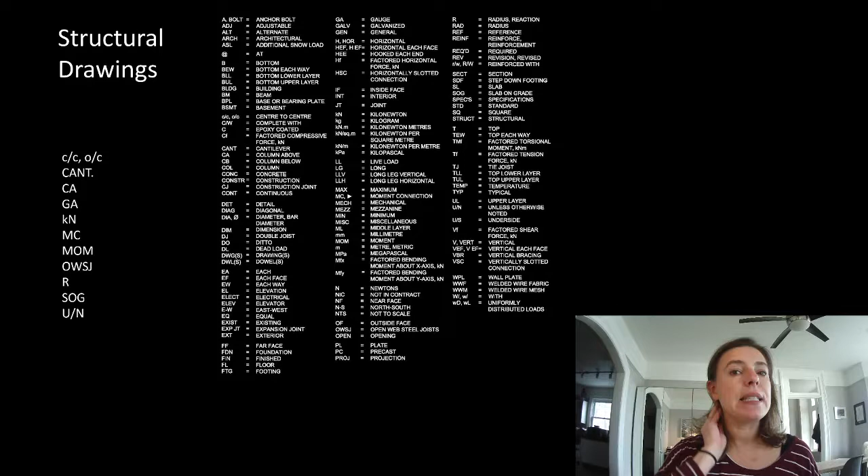Sometimes for small houses we might do something like that, but for the type of drawing sets that we're talking about, you need a set of structural drawings, and that's what you're going to produce in Structures 2 for me. So what I've given you for those two projects is the structural set of drawings and also the architectural set. Now, one thing that was really interesting about one of the projects, it's the Cube Lofts that Raw Architects were the designers for. It lent itself very well to be a steel building,

so we designed it and went out for tender, and right at that moment there was a blip in the steel economy in Canada, and basically North America. It was just leading up to the Beijing Olympics, and there was no steel to be found in Ontario, or pretty much North America. You just couldn't find it. You couldn't get it. So steel costs doubled in a week. They stayed doubled for about a month and a half. We went out for tender the week that steel started to explode. Tender came back obviously way over budget.

The owner wasn't an easy client to have, and the owner demanded that we redesign the building in concrete. And fair enough, they had had more experience with concrete buildings, and we as the design team had pushed them to steel. We said that the steel market was coming back down and to hold on because we thought that the steel building was the right choice for the project. They insisted that we go with a concrete building instead, so we redesigned the building completely in concrete. It took about 6 months.

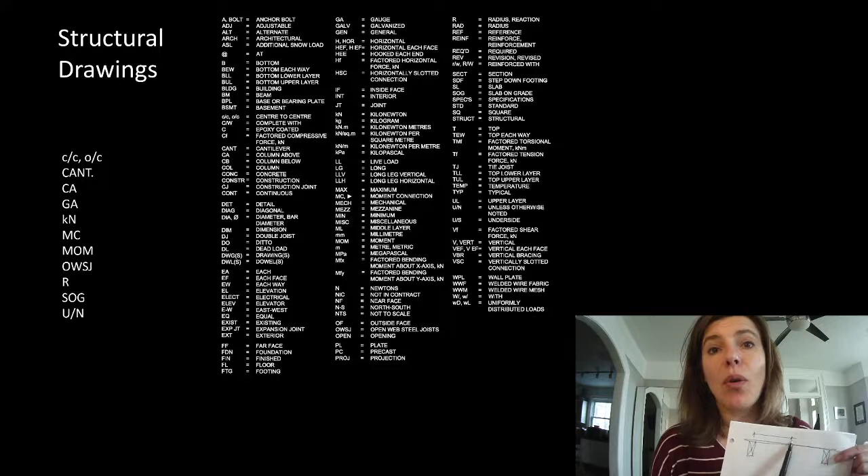And if we're talking about something that we have a lot of, we might say 2x6 joists at 16 inches center to center. And so we're saying that for that whole floor, every 16 inches you have to have a joist. So they could be closer than that, but they need to be no more than 16 inches apart. And so that's the CC or the OC.

CANT is cant or cantilever. You can see it right here in this. It means that there's a cantilever. It is only supported at one end. So a cantilever. I'm drawing a little picture here. If a beam looks like this, it's got a support here and a support here. This is the back span and this is the cantilever. It has to be connected across here in some way to make that work.

Or, and you guys are going to learn about this when we talk about free body diagrams in a few lectures, we could say that it is moment connected right here. And that is a drawing of a moment. Moment we have down here, or MC, moment connection, or MOM, we're talking about moment.

CA means column above. So that means if we have, in elevation, a building and all of these columns come down. We have this building here, and this is the roof, and this is the ground. All of these columns come all the way down, except for this one, and it sits on this beam here. And so in plan, we would say column above.

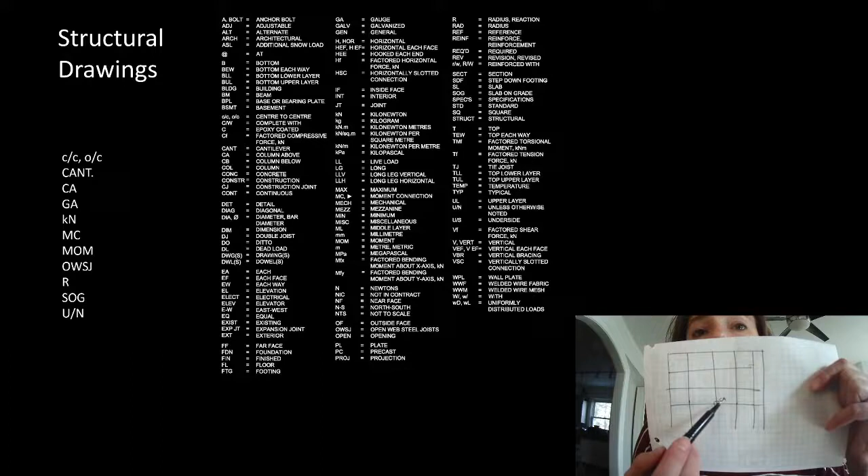So that's reminding us that that beam is doing a very big job. It's not just supporting the floor, it's supporting a bunch of floors above because there's a column above that does not go down below it. GA often means gauge, or the thickness of something, of steel. If it says 16 gauge, you can Google what thickness that means.

KN, kilonewtons, very, very important unit that we are going to use a lot in the next two courses, so this course and your Structures 2 course. In lecture 5, we're going to spend a good chunk of time talking about what a kilonewton actually means so that you can get a sense of it. But if you see this, you know we're talking about a force. So I touched on MC and moment.

Another big one that people tend not to know is OWSJ, or open web steel joist. An open web steel joist is not the same thing as a joist. It's not the same thing as a truss. It is a steel fabricated element, and we're going to talk about this in lecture 4 as well. And I'm going to show you a slide in just a minute, just so you can get your head around it. You've all seen what an open web steel joist looks like, and we use them all the time.

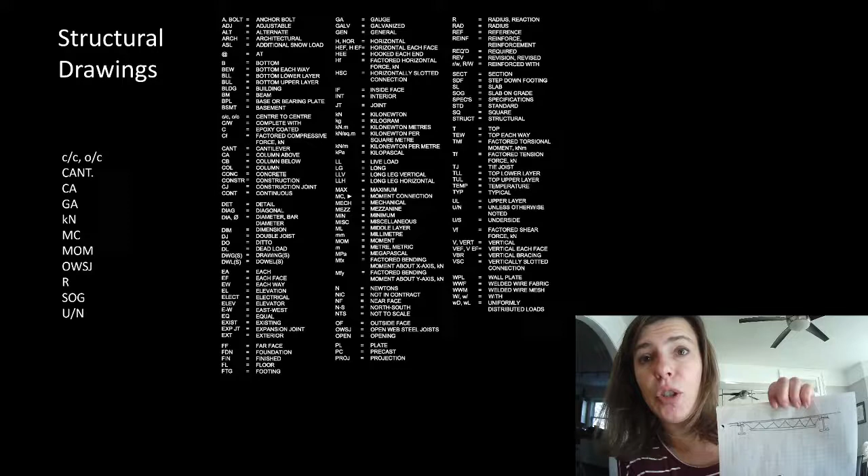Okay, an open web steel joist. This here is the open web steel joist. We've got a top chord, which is the top part. We've got a bottom chord, and we've got webs. An open web steel joist means that there's openings in the web of our joist. And so this is usually back-to-back angles, top and bottom, and then with bars or rods built up in between.

Look, the top of the open web steel joist and almost the top of the steel beam align with each other, or basically our deck is right there. We don't hang these from the bottom, we don't stack them on top. We do stack a tiny little bit, that's just because an open web steel joist has a shoe. And so we often drop steel beams that are picking up open web steel joists just a tiny little bit. But normally the top of all of our steel is at the same plane.

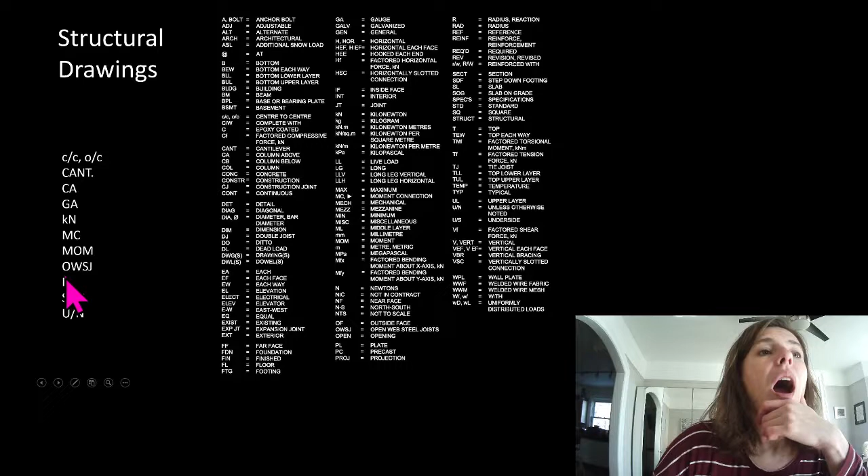R usually means, it can mean two different things. It can mean radius or it can mean reaction. So you have to look at it in context. SOG, slab on grade. And we're going to talk about that in the last lecture. Second last lecture, as well.

And then UNO, unless noted otherwise. So, like I said with the open web steel joist. So 2x8 SPF number 1, number 2, joist at 16 inches on center unless noted otherwise. So maybe there's a few spots that need something different, but that would be typical. So that means that everything that was written there applies the majority of the time unless there's a note on a specific thing that says otherwise, and it overrides it.

Like I said, we're talking about the loading side of things in Structures 1, and then talking about resistance or capacity in Structures 2. So we're really interested in things like Cf, the factored compressive force in something. Tmf, the factored torsional moment in something. Tf, the factored tensile force in something. Vf, the factored shear force. Mfx, maybe Mfy, but Mfx, factored bending moment. And so all of these little f's mean that we've factored them already.

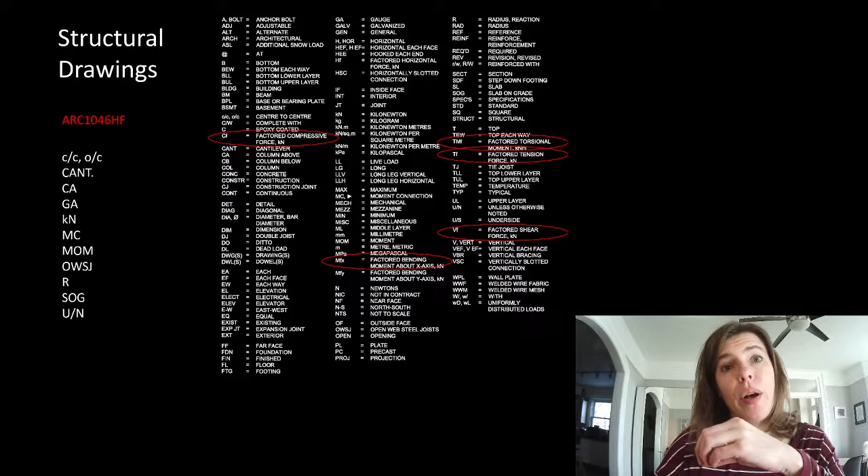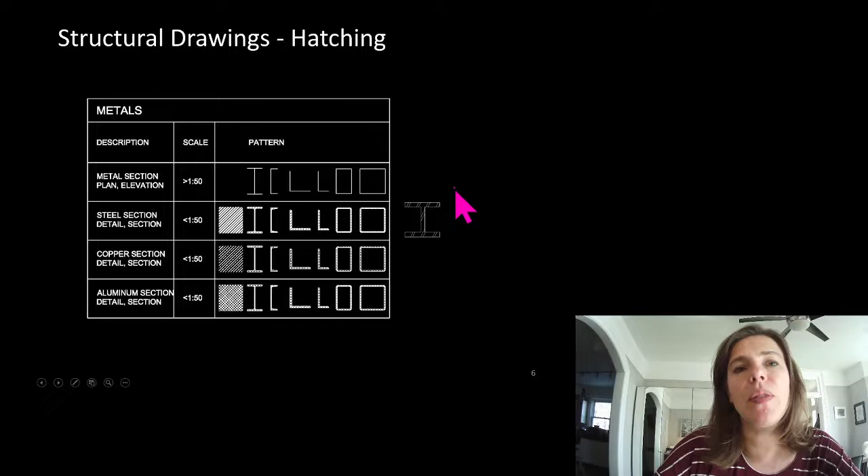This means you're looking at the section of a beam, maybe a column. Don't worry about this. Mostly I wanted to show you what steel sections look like. So if we do a section that is cutting through our piece of steel, our imaginary cut goes through the steel, we would draw these two little slash lines on a regular pattern across the section to say that that's a piece of steel. It just tells us at a glance that we're talking about steel.

I'm going to open up the PDF of typical details and just go through them quickly. We might jump back and forth between the basic building I created. Even though there's nothing normal about it, it's a building I created to help us talk about structural drawings.

Things that you should always, always, always have on a structural drawing set: grid identification, grid dimensions. In Structures 2, so many students do not put a dimension anywhere in their project, which means I don't know if the things they sized are correct because I don't know how big it is. I can't even correlate with what they've got drawn on there. Labeling things. Everything should have a name that correlates to something. So you could name your beams right on the drawing, or you could label your roof beams RB01 through RB100, and then somewhere else you have a list of what RB1 through RB100 is.

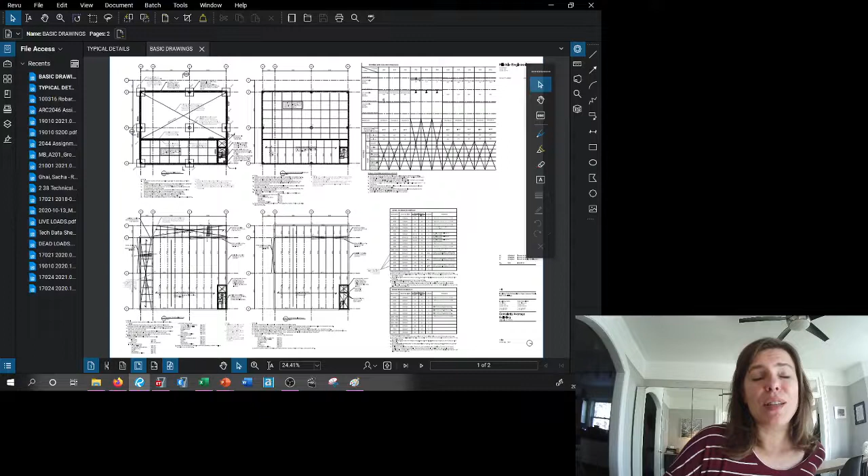I'm sorry, because my mouse is so large, it's very weird. Like I said, it can be minuscule or gigantic. It's just about the recording software that I'm using. It only lets it register two sizes. I don't even know why, but it only lets it register one of those two sizes, no matter what my screen is showing me. So we have to have the gigantic mouse.

So let's take a look. This is a completely average building for University of Toronto. It is a partnership between Imaginary Architects and Faith Associates, a partnership for super totally awesome made-up buildings. So this particular building, this is the steel version of it. I also have the concrete version of it.

My ultimate goal is to make sections throughout the building for you as well, but this took time I did not have to make as it was. I might try to get some sections thrown in for this. We'll see. I thought I was in good shape this week to make those sections for you guys, but a project just went sideways that I have to deal with. So that's going to steal like 40 hours of my week this week. So I'm not going to get to cutting sections for you guys for this, but it's not needed. I thought it might be nice to have.

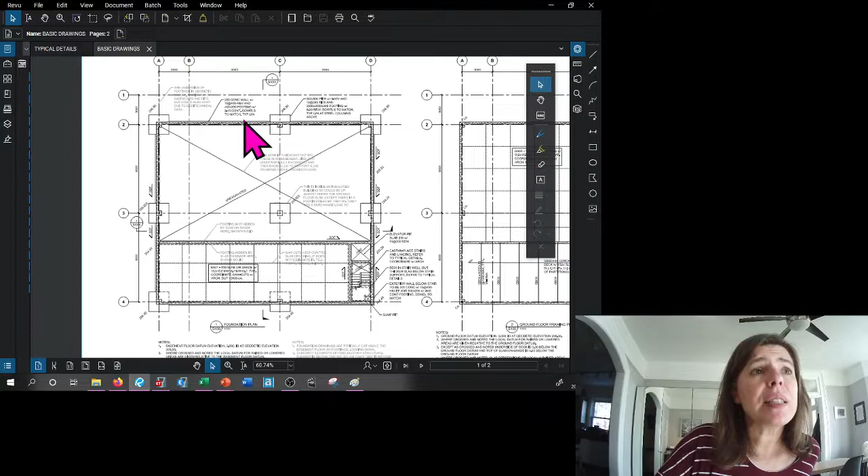So let's zoom in. Let's see if I can get this even bigger here. This will have to do. So this is our foundation plan. And like I said, you guys can be looking at these on your bigger screen if that's helpful. We've got grid lines A, B, C, D, 1, 2, 3, 4. It looks like they go through the center line of something. I'm going to tell you that it's going through the center lines of the columns.

For steel buildings, it is very helpful to have your grid lines go through the center lines of your columns and reference everything off that. The architectural grid lines are going to match, and they're going to go through the center lines of columns, and then everything would be dimensioned off of that. You can see that we're looking at the foundation, so this is what's down in the ground. Now, the way sections are cut for plan, there was kind of a change on this since I've been working. Actually, I don't like that section that I just drew there.

The way we tend to draw our buildings is cut looking up, or what we call a reflected ceiling plan of the structure. And that's very handy because it shows us what our columns are going through. Concrete sometimes is cut looking down, and it can be very confusing because we're showing columns not aligned with the things we're looking at. We're not looking at the framing for that floor. So there are pros and cons with both things.

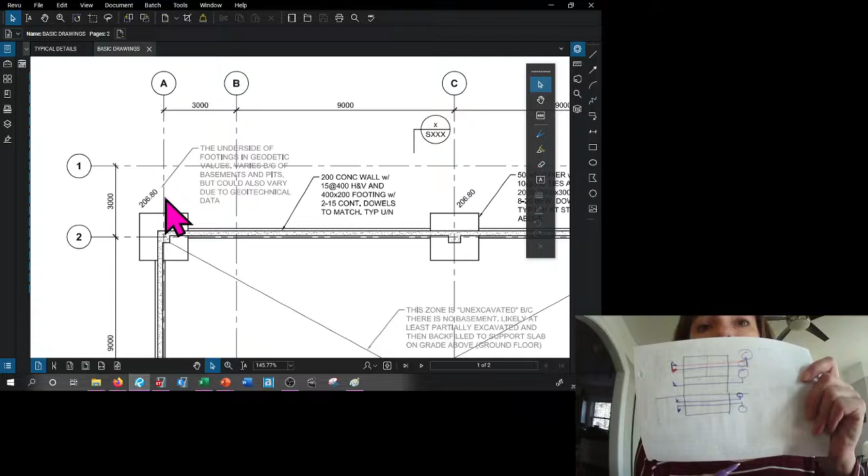So a building with these stories that has a foundation or a basement, a ground floor, a second floor, and a roof, we would cut and look down at our foundation right here. We would cut through those same walls and look up at that framing. We would cut through these columns and look at that framing, our level 2 framing. And then we would cut through these columns and look up at our roof framing. And that would capture all of our scope in our drawings.

And this is the process that I have done for these drawings. So this is the foundation. So it is cut and looking down at our foundations. So that means we are cutting through our walls, so we should hatch them, and we're looking at the footings below. So we're not hatching them, we're looking at the outline. So you can see here that I've cut through a wall, and there is the footing below. And there is our strip footing right here.

In light coloring are notes that would not normally be on the drawing. There are things I've included that I think you might find helpful as a note to see what the wording is. So this is dark. This would actually be on the drawings, and it is a datum. So here I've let you know that this is the underside of footing in geodetic values. It varies because of basements and pits, but could also vary due to geotechnical data.

Sorry for any typos.

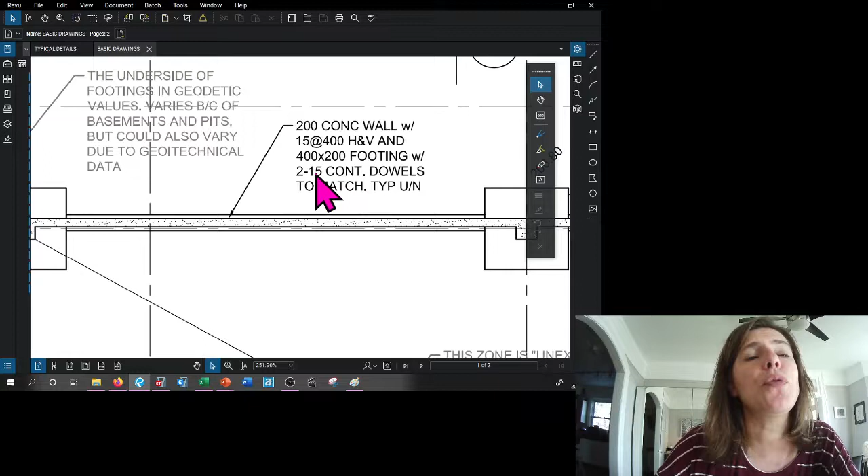This is a note that would actually be on the drawings, and it says 200 conc, which means concrete wall, with 15s at 400, horizontal and vertical. So within that wall, there's reinforcing that is vertical and reinforcing that is horizontal, and they are 15 millimeters in diameter, and they happen at 400 millimeters center to center, and a 400 by 200 footing with two 15M continuous, dowels to match, typical unless noted.

So that means we have a footing with rebar that's running consistently through it, and there are dowels to match our wall footing within that wall. So this one note is probably 90% of the scope on this drawing. That one note captures almost all of the cost of this floor. This zone here has a note that says unexcavated. So that means in that building that we've drawn, we have a zone that seems to have a basement and a zone that doesn't.

So I'm drawing just a new little section. And this is the stuff that I would have loved to have gotten in the sections for you guys. So this over here is what we're looking at, and we're looking at these footings right here, and this zone is unexcavated because we are making a cut looking down like this. So we are looking at that wall and that footing, and then we're going to come over here to ones that are deeper with some sort of slab, and we'd be looking at this slab right here. So this zone is unexcavated.

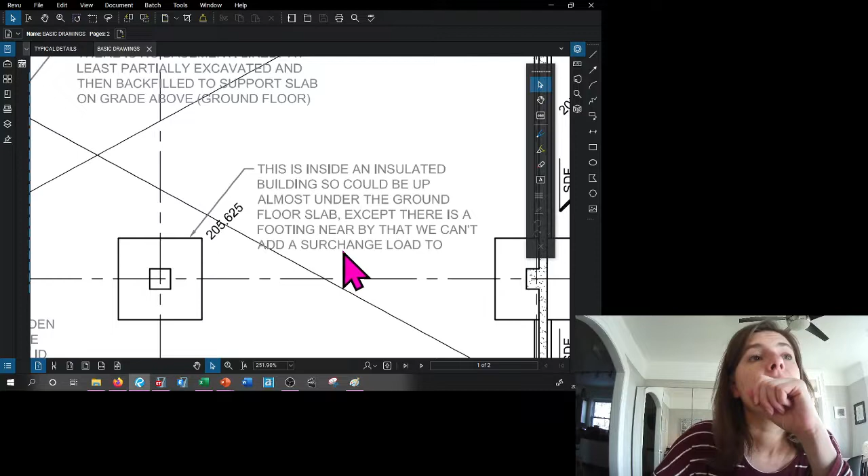This is inside an insulated building, so this column can be up pretty high, or that footing can be up pretty high. These ones here need to be down at least 4 feet for frost. They can be pretty high up because they only need to be down 4 feet for frost. But over here it looks like we have a basement. We can't have our footing go along and then drop a bunch and keep going. We need to slowly taper that footing down to get to the new level.

So we will often include this note that is SDF, or step down footing. That means that at this point we are dropping down to a new datum, and then we're dropping down again to this datum. So up here we were up pretty high, and then we slowly dropped down to this zone here. Now this is a basement, and this is the floor of the basement that we're looking down at. This says BS01, that's a reference for me to know that I'm tracking things, but most people are pretty consistent, and you can probably infer that this means basement slab number 1.

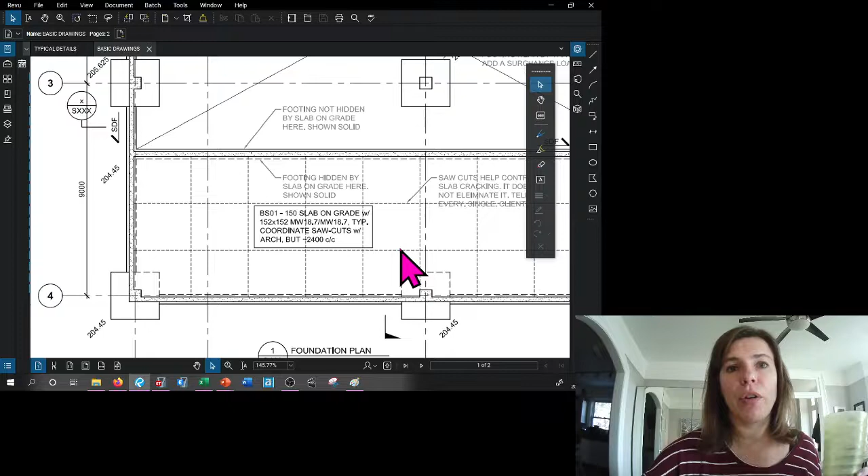150 slab on grade with 152 by 152 welded wire mesh, coordinate saw cuts with arch, but no more than around 2400 center to center. So I've drawn some intent of saw cuts, and that is to help control cracking in the slab. Get your head around it, concrete cracks. Always, 100% of the time, concrete cracks, but we can do what we can to try to help control where the cracks happen. And that's what these saw cuts are.

Saw cuts help control slab cracking. It does not eliminate it. Tell every single client. I'm my own company, so I'm not doing the massive projects, but my husband's company, Blackwell, especially when I was working there, I knew more about every single project that was happening. Probably 50% of the lawsuits they get are from clients who do not understand that concrete cracks, and they sue because of it. They say, oh, I have big cracks in my concrete, I'm going to sue you.

Even me, I have a project that is going right now that the concrete cracked. I told everyone at the very beginning, the concrete's going to crack. We can do what we can to control it. We can try to control it even more by putting more rebar in it, but nobody wanted to. They said it was too expensive, so we didn't.

And now the client, the contractor, and even the architect, who all knew about this, are saying, why is my concrete cracking? Luckily, I had those emails, not because I want to make them look foolish or anything, but I kept those emails where I reminded them what we do for concrete cracking. And so the issue went away. But if you tell your client and document it, you will probably avoid some lawsuits that are, let's face it, kind of frivolous ones to begin with.

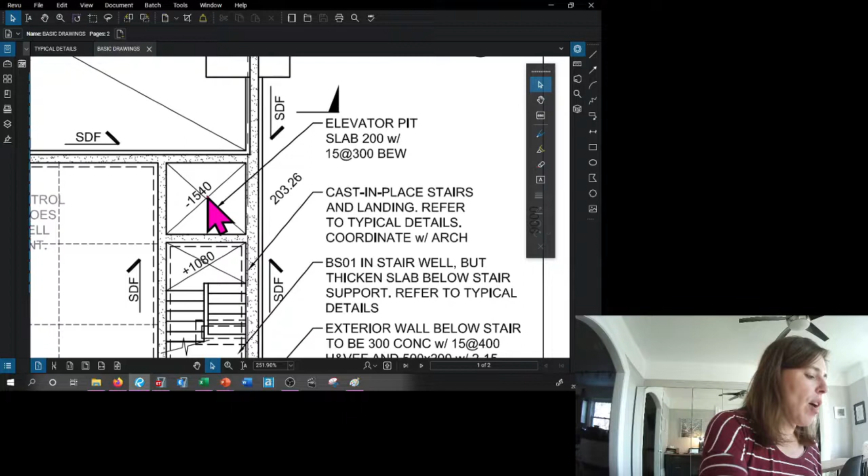That is most of the information over here. Let's come over here to this zone right here. Okay, so this is an elevator pit slab, 200 with 15s at 300 bottom each way. So elevators often have a little pit that comes down about 5 feet below the level. And usually there's electronics or a motor, or that's a work shaft, a safe spot that somebody could crouch down in if the elevator came down. There's all kinds of different, sometimes it just drops down some, but 5 feet is standard below your slab that's right here. So this is 1540 below this slab, so that's 5 feet.

And rather than strip footings in a slab, I have made it match the footing. So the elevator pit slab is basically just a big portion of footing, and it's got a bit more reinforcing in it. Sometimes they have like a post in there. Sometimes there'll be a sump pit in there as well. This is my stairwell. I have a sump pit in this stairwell. That's where the water would drain to, and then there'll be a sump pump that actually pumps the water out.

The exterior wall below concrete stairs is a little bit bigger. I've made it 300 with 15s at 400 horizontal and vertical each face. So now instead of just horizontal and vertical rebar, there's horizontal and vertical rebar at each face of the wall. The footing is a little bit bigger as well. And you can see that I've shown some context for the stairs. For this stair, I've said it's cast in place stairs and landing. Refer to typical details, coordinate with architect. You could do steel stairs here, you could do cast in place. You could do precast stairs as well.

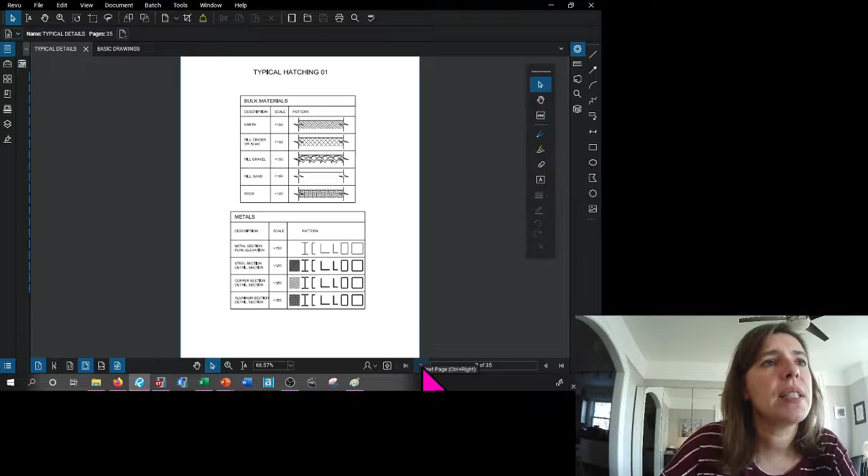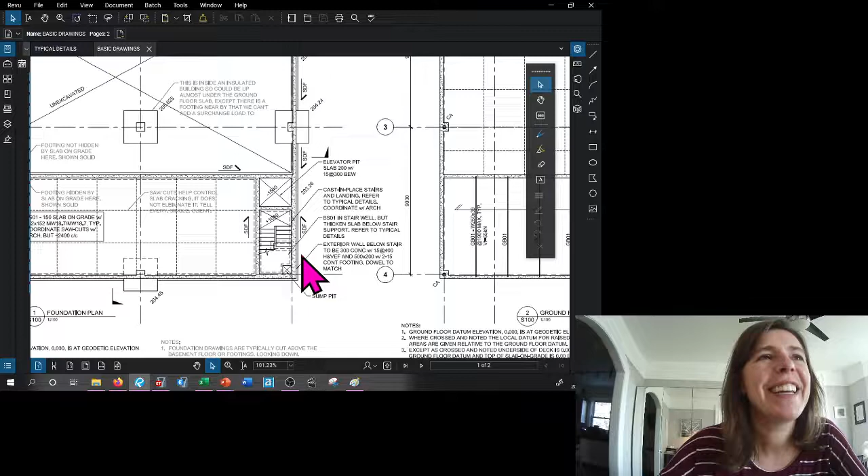Sorry, it's been busy out on my street right now. Do you guys want to see? I wonder if you guys can see my view. Oh, it's probably too bright. No, it's too bright. Yeah, it's a beautiful day out there, and I just wanted to share my luckiness with you guys. But maybe I'll take you on a walk out there later.

We have notes here. It says basement floor datum elevation is 0. That basement floor datum elevation is at geodetic elevation 205. So there's something in the architectural set that says what these datums are, and everything is referenced from that. Where crossed and noted, the local datum for raised or lowered areas are given relative to the basement floor datum. So that was our elevator pit, and our landing and our stairs were given relative to the 0 node.

Except as crossed and noted, top of finished floor is 0 below the basement floor datum. So that is our floor plane. Where crossed and noted, slab depressions or locally raised areas are given relative to the basement floor datum. So maybe we have a curb or a housekeeping pad, or maybe sometimes we'll notch the concrete down an inch or 2 to inset a grill for like a drip plate for muddy boots.

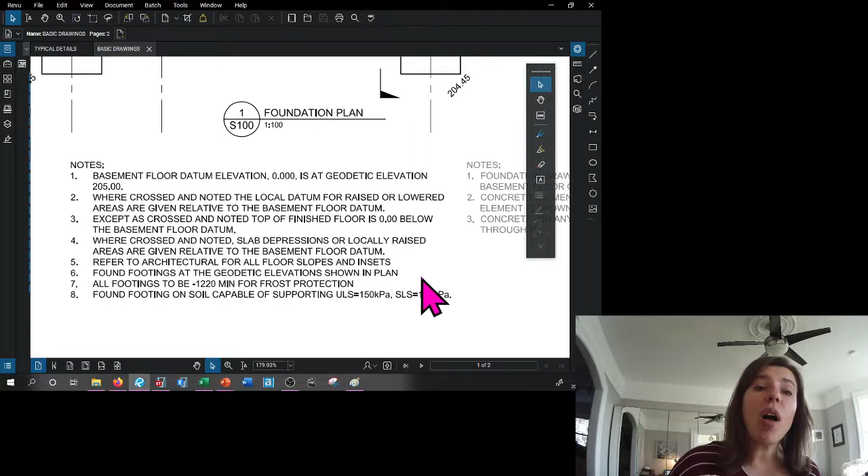There's also a note, found footing on soil capable of supporting ULS 150 kPa and SLS 100 kPa. There's a soils report that goes with the project that tells us what the soil capacity is. Now, soil testing isn't perfect. They are testing a representative sample of the site. They usually need to be there and look at the footing before it's cast to make sure that it was all what they expected it to be. This note is here in case they find a patch that is not good enough.

So all of my notes are based on the geotechnical report, the imaginary geotechnical report for this project, the geotechnical report that said good soil is at this level and you can do this. If they found on site that, you know, maybe, I have a project right now where there is an old well that no one was expecting right here. So we needed to know, do we dig down further and lower this footing, or do we do something right there?

On this particular project, they're filling it up with basically cheap concrete. It's called lean mix. It's stronger than the soil, but it's not as good as normal concrete. So it's kind of a cheap way to fill it up, especially when it's a massive old well that they need to fill up.

Sorry, I went for a 10K run today, and it's the most I've run in a very long time. So I am sore, and I'm tired, and I'm very, very thirsty.

So these are just some notes that I wanted to add to expand on that. I might have even covered all these. Okay, so this is just a note reminding you that they're cut looking down, dashed because we can't see beyond, hatched if we're cutting through it. Look, great, I covered all of that. So now let's jump to our ground floor framing plan.

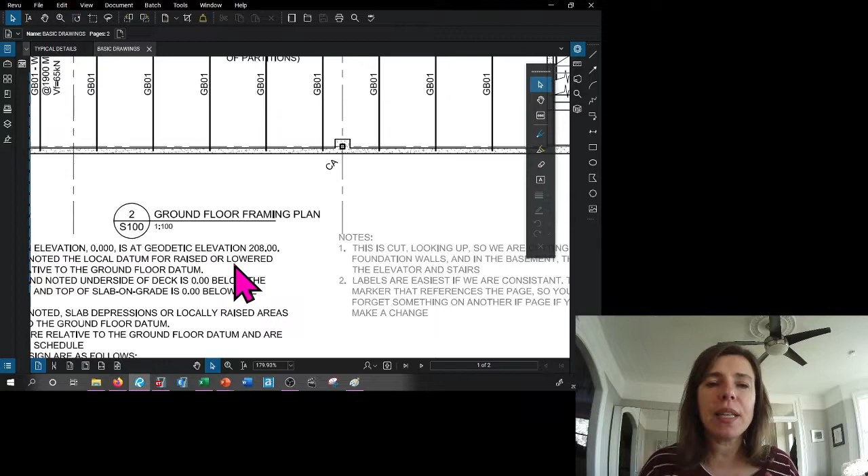So ground floor framing plan, we're cutting through those foundation walls again, but now we're looking up. And what's handy about that is any framing we have here, we're showing what it's sitting on. We're showing what's supporting it. So these walls are supporting anything we have, and so we actually get to see what is supporting our structural elements. So let's maybe start with the notes.

Ground floor datum is at 0, and it's at geodetic elevation 208. So it seems like 3 meters above our basement datum. So our basement was 3 meters. Unless otherwise noted, levels are relative to the ground floor datum, except unless otherwise noted, underside of deck is 0 below the ground floor datum, and top of slab on grade is 0 below the ground floor datum.

So there are some interesting notes here. So that means I have a step here. That would be a thing I might change here, but often concrete, we're talking about the top. Unless it's a topping, steel, we often reference the underside of metal deck. So if it was our concrete slab on grade, and I'm going to draw 2 different drawings here.

Sorry guys, I know it seems like I'm being weird looking down here doing this, but I don't have a means to draw this.

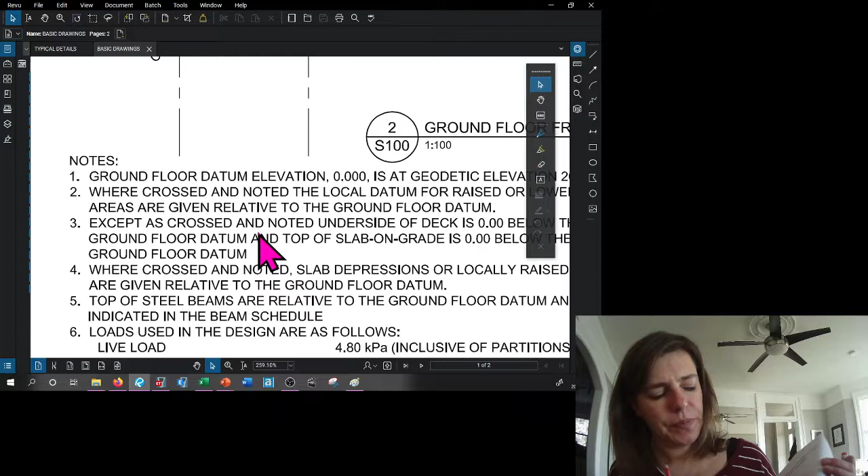So for a concrete building, we often do our datum to the top of the concrete. For steel, we often do our datum at the underside of the metal deck. So really what we're saying is the top of the steel, but then we have those pesky steel beams that drop because of open web steel joists. So we tend to reference the underside of metal deck.

I made both of those 0 here, which means that I have a step here. Not a problem. Maybe that's what I intended all along, for there to be a step between these sides of the building, but it would be something I'd need to capture in a section, because the underside of this metal deck is at 0, and the top of this is at 0, which is essentially saying I have concrete on metal deck here with some sort of closure angle, but my top of concrete is here with a wall. There'd be more to this detail than this, but they're both saying that they're at the same datum.

So my underside of metal deck here and my top of concrete slab on grade here are at the same datum, which means whatever this thickness of assembly is, is how much this is raised. So maybe I should tweak that. You wouldn't tend to normally have both of these on the same spot at the same time. So I would leave it like this. If I draw a section, I'll leave it specifically to show that weird interface for you guys.

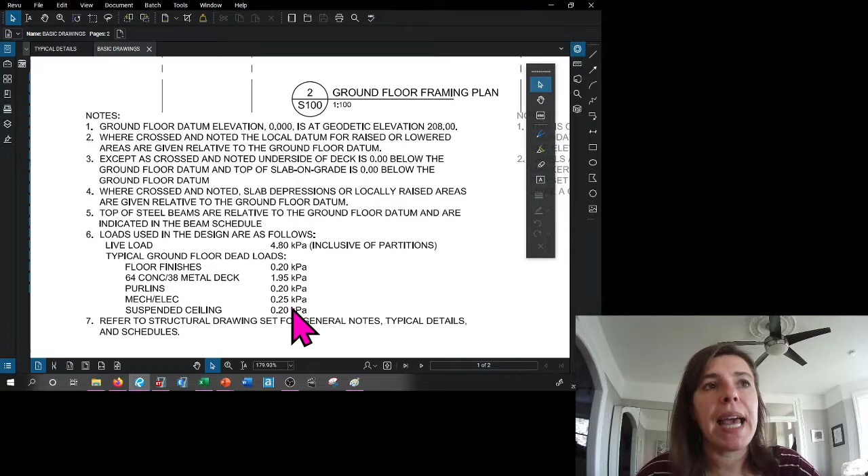Typical ground floor dead loads. So this is how heavy everything is that makes up our ground floor. Refer to structural drawing set for general notes, typical details, and schedules. So it's reminding the contractor that they have to look at this package all together for it to make sense. Let's take a look at this floor plan. Remember, we're cutting through the walls and looking up at our framing.

Well, this zone over here is a slab on grade, because remember that was an unexcavated zone. It looks like the information is very similar with some saw cuts in it. They've given us notes that there are columns above here, so somewhere right above here our columns are found.

This zone here had a basement, so we need something to make up the floor here. So we have an assembly of things. We're gonna have the flooring, what the architect specifies, sitting on a slab of some sort or a deck. And that's the thing that covers every square bit of surface. But then that needs to span and be supported by something.

That's what we would often call purlins, or open web steel joists possibly. And then those would often span to beams or walls or columns. So here we've got GS02, or ground floor slab 02, because this was ground floor slab 01. This is 64 concrete on 38 metal.

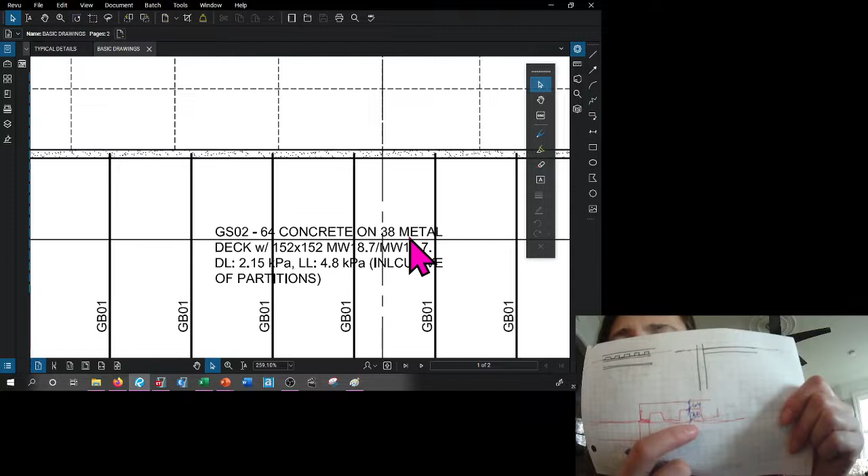What they are saying is that, I have not drawn this to scale, so don't fret about that, that we've got 64 millimeters of concrete on top of 38 millimeters of metal deck. We're gonna look at this again, don't worry about it, you do not need to know all of these things. We will talk about it more. There's a whole portion of a lecture where we talk about steel and kind of the bits that make up our steel framing.

So that means it's a total of 102 millimeters. So the underside of this deck aligned with the top of this slab. So it seems like we have a 4-inch step from this side of the building to this side of the building. This concrete on metal deck spans in this direction. So the flutes are running in that direction.

If you picked up a piece of corrugated cardboard, in one direction it bends really easy, and in the other direction it does not. Well, we are taking the direction that does not bend easy and spanning it that direction. Even though it's one big thing, bits of it are being supported by bits of beams.

So this beam here is supporting, can I do it for me? Is supporting, well, that's not very helpful, is it? Let's make that a color. Let's make it green and green.

So that beam right there is supporting that much of that portion of deck and that much of that portion of deck. So that is something that we would call a tributary width, and that is the length of the beam, but the entire tributary area is that zone right there.

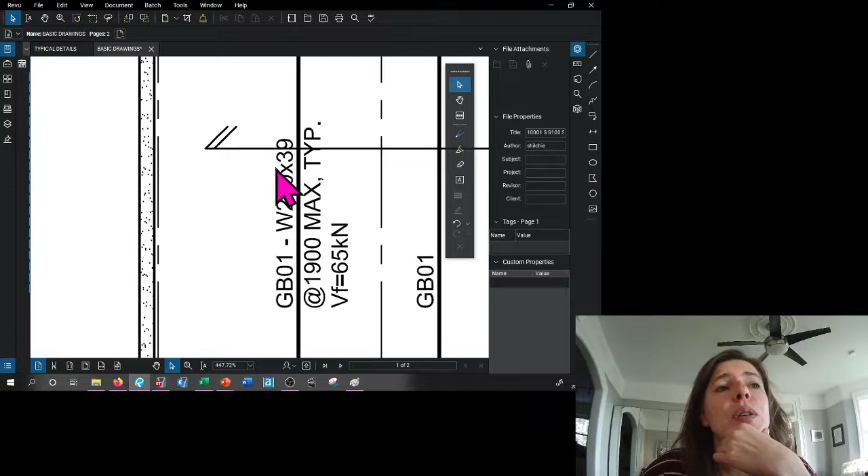GB01, it looks like these are all the same beam, and it says GB01 is a W250x39, so that's a type of steel beam, or ground floor beam 01 is a W250x39 at 1900 max typ. VF equals 65 kilonewtons. So they've given us a factored shear force in kilonewtons. They've told us what the beam is and how often it needs to occur.

They can be closer spaced than 1900, but the maximum distance between one of these beams is 1900, or the maximum distance our deck can span between supports is 1900.

We have our stairwell over here. It looks like the stair over here now has steel stringers. We've got a doorway to get in. We've got another landing that we can come in and go up. There's our stair going down. There's our stair going up to a landing, and it keeps going up to the next floor.

This looks like these are steel stringers, which means that this is a steel stair with some sort of pan construction on it. For those of you that have been in One Spadina, which is none of you, I guess, at this point, the stairs have this style of construction, but you've probably mostly seen that style of construction.

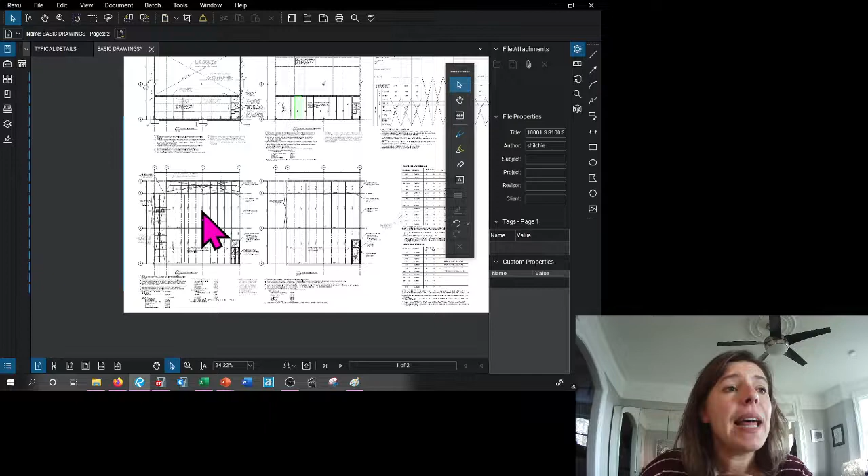Let's go to level 2 framing now. So we're going to look at something cutting between the ground floor and level 2, looking up. So we'd be cutting any of the columns that go from the ground to level 2, and we're showing the framing at level 2. So it's supporting everything on level 2.

Level 2 floor datum is 0, and its geodetic is 211. So that means it looks like we're another 3 meters up again. Except where noted, for local datums, underside of deck is 0 below the level 2 floor datum. So underside of metal deck is our datum, except if it's noted and says otherwise.

Where crossed and noted, slab depressions or locally raised areas are given relative to the level 2 datum. Top of steel beams are relative to the local datum and are indicated in the beam schedule. So we would come over here to our beam schedule for the tops of those beams.

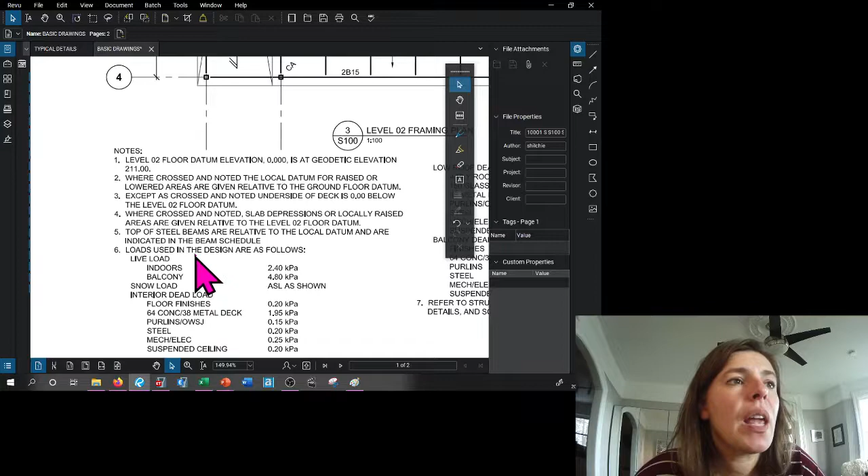And then we have live loads. Ooh, look, and snow loads. Ooh, and interior dead loads, and a low roof dead load, and a balcony dead load. So it looks like in different zones of this building, we have different loads. Not all the same load is everywhere on the building. And this part of the building sees different loads than this part of the building.

So we have our interior space, we have live loads that are indoors and on balconies. We have snow load, ASL as shown, or accumulated snow load as shown. Sometimes they'll just give us a snow load that has already been designed. So they've already taken the information I'm going to give you in lesson 5 and manipulated it to find the total. And then you guys are going to see that I'm never going to make you calculate accumulated snow loads. I'm going to make you calculate snow loads, but I'm not going to make you calculate accumulated snow loads.

And so knowing if it's been calculated or not, for getting accumulated snow loads, is very important. If you see SS and SR, this will make sense in lecture 5. You need to do something with it. If they just say the snow load, they've already done something with it. And that's going to be important when you work on your projects.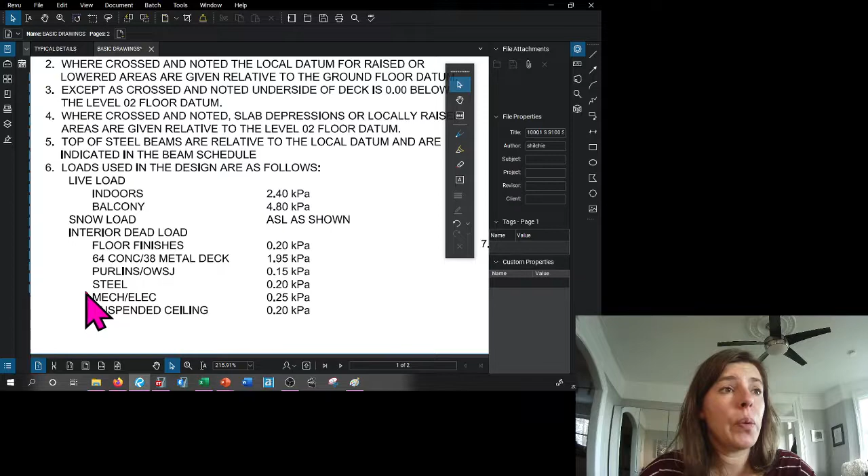The interior dead loads have floor finishes, 64 concrete on 38 metal deck, purlins or open web steel joists with a load, steel, they've given us a load, they've given us a mechanical and electrical load and a suspended ceiling load. We're going to talk about all of that when we do dead loads in lecture 5 as well. And then we have a low roof and we have a balcony. So it seems like this is the interior of our building.

And over here, something is crossed and noted. Let's see what this crossed and noted thing says. It says minus 250 for the underside of our metal deck. Ooh, they've given us a total snow load. So it starts over here and comes down, so it tapers down. They've labeled this deck as 38 metal deck spanning in this direction. And we have purlins that it's sitting on.

The difference between beams and purlins and girders is going to be important when we talk about steel. And I believe that is lecture 6, yeah. Yes, lecture 6. We're going to need to know about that. Don't worry about it too much right now. Just know that it's a type of beam. It's a beam.

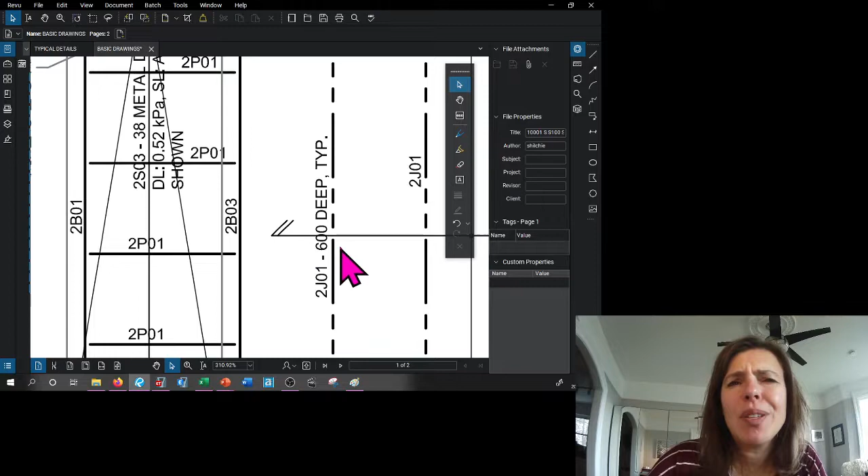This dashed line here tends to be an open web steel joist. We tend to draw this line when it looks like this. It usually represents an open web steel joist. And look, they said 2J01. Gives us a pretty good feeling that it's an open web steel joist. This drawing, very much on purpose, I wanted to show joists and beams and purlins doing our floor framing, because they're essentially the same idea, the same concept. We have a concrete on metal deck spanning this direction.

And over here we have a balcony. Ooh, look at this. Cant. That means that's a cantilever. See this solid colored black triangle? That is indicating a moment connection. It's another way to indicate a moment connection. And so right there, we are saying that this beam is moment connected to this beam. But the beam might not be the same beam. It might change. So they need to weld it up together in some way.

Ooh, over here, there is a note that says column above. So this beam goes from C all the way over to A with a point load coming down on it. That seems like it's a hefty load on this beam. This one does the same thing. So column above between second and roof impacts beam, so it's helpful to see it even though we aren't cutting through it. So that's not one of the columns we're cutting through because it's up above what we're looking at.

But it's nice to know because at a glance we can see that there's something big and nasty happening to this. So there's no column below. This is not a support of this beam. This beam is supporting this column because they've told us that this column does not continue down. So this balcony cantilevers out.

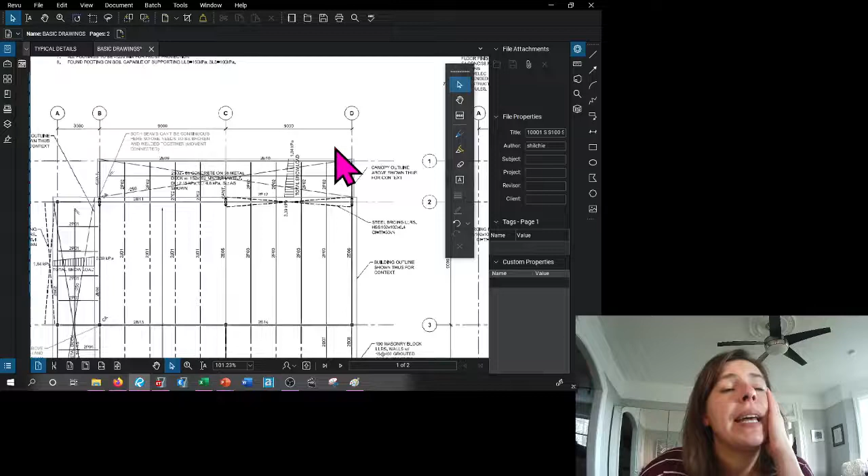Our stairwell here has switched to be masonry block lateral load resisting system, or LLRS. Walls will have 15 at 400s grouted solid. Refer to typical details for lintels. So I will switch over to typical details and we'll take a look at some of this stuff. Stair and landing designed by supplier, contractor to coordinate bearing pads. So we've got steel stringers. So this is the same as what we had below, framing into our masonry block. Let's switch over to some of our typical details that might take a look at some of our steel framing now.

We'll come back and look at the concrete ones when we look at the concrete building. This is lintels for masonry. Look at this. Here are the lintels that we would need to frame those openings in the block for a doorway. That's a lintel.

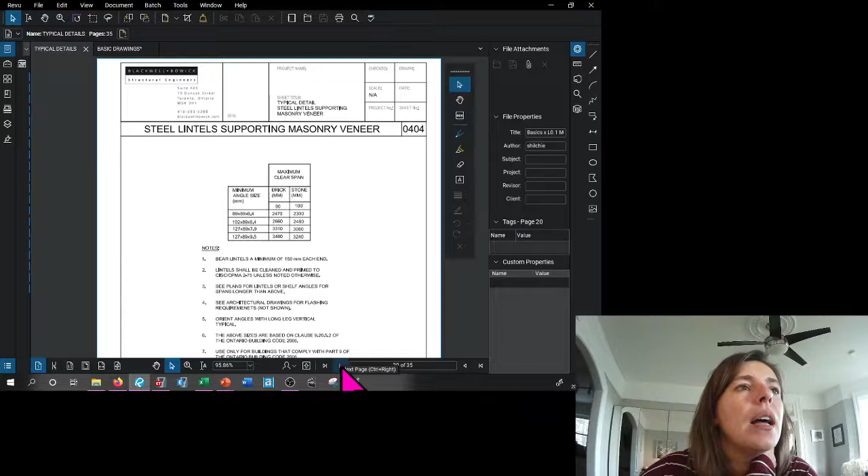Metal deck being supported by masonry. Let's not worry about that too much. Do we have just a typical detail of steel? Interesting. I don't have a basic steel detail. Okay, well I'm going to hand draw you one right now. We will see more of them throughout the course, so don't worry about that.

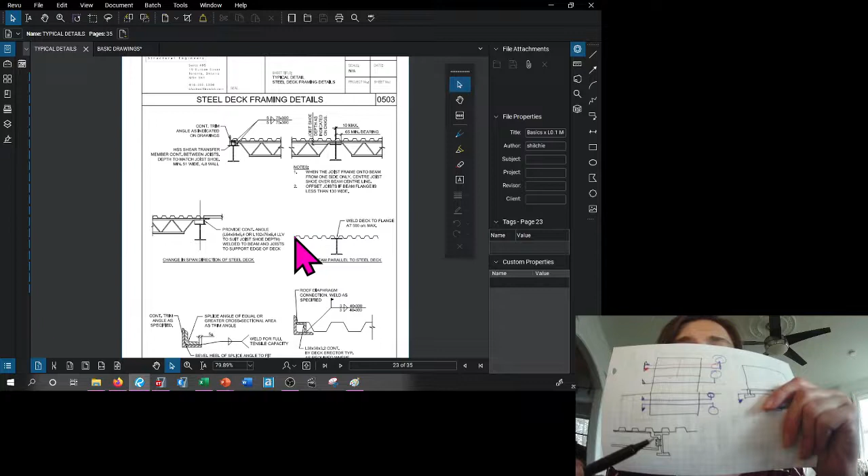For a typical steel connection, we might have two separate beams that look like this. So we have our metal deck, and we have our purlin, or it's just a type of beam that is doing a similar job to an open web steel joist, and another beam. So look, both of them are at the underside of the metal deck. See, we've coped our steel beam, which is not a big deal, they do it all the time, and then connected into the side of this steel beam with a clip angle.

So let's go back to our drawings here. So that was our level 2. Let's take a look at the next level. We have our roof framing plan now. So our roof framing, we've got our datum that we call up, referencing off of our datums. Roof is sloped to drain. Deck and beam local datums are relative to the sloped roof. So they tell us where things are sloped to. Sometimes we can make it all flat and they'll slope it with insulation, but if you can and it's easy, you might as well slope with your steel.

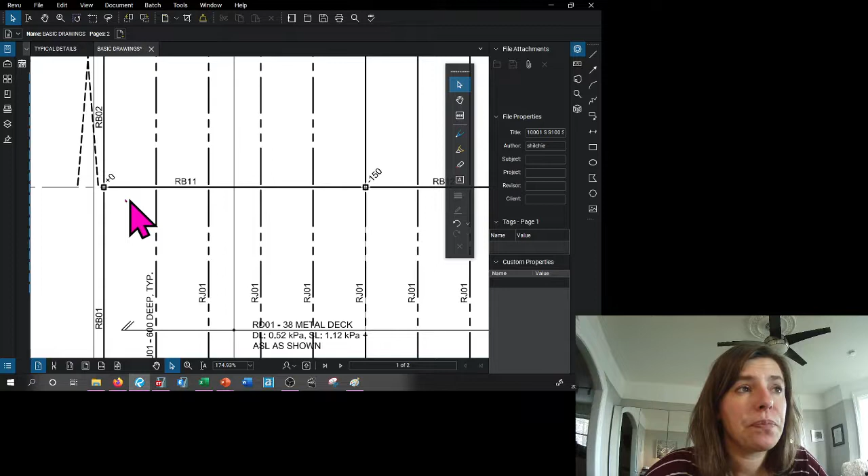Let's take a look. How did they slope it? Well, it looks like that's 0 and that's minus 150. So it looks like that beam goes on a bit of an angle. You guys are backwards to me, so it's throwing me off. It slopes on a bit of an angle. Not much, just enough that if they put a roof drain right here in the deck, and they probably run it down along the side of the column, they can get their slope almost for free without using insulation. Top of steel beams are relative to the local datum.

We have our snow load. So see, look at this. Snow loads: 1.12 kPa plus ASL shown on plan. We're going to talk about this when we do snow loads in lecture 5, but this means somebody has calculated the snow load for us already. And they've shown us where the snow loads are. This is not SS, this is not SR. Again, that'll be clear in lecture 5, but pin this in your mind for talking about the project. This is the snow load. Somebody has already figured out what the right snow load for this building is.

There's the dead loads, and just a reference to look at the full drawing package. So there's not many surprises here. It's pretty similar. We're showing our bracing or our lateral load resisting system, which means that we have something stopping our building from tipping over.

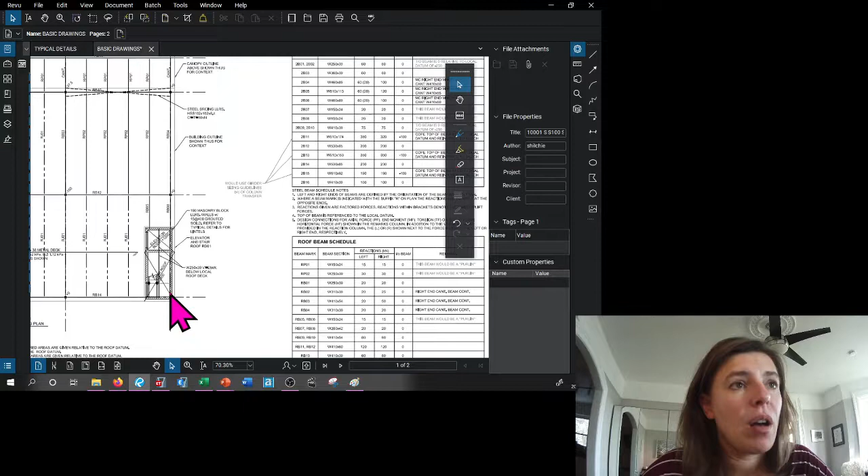This would be our lateral load resisting system in elevation. So it's the thing that stops our building from tipping over. It looks like we have 2 lateral load resisting systems. We have steel bracing and masonry block over here around this elevator core. We're going to talk more about lateral load resisting systems, don't worry.

Let's take a look at the schedule. So here is the mark. We've labeled what everything is, and then we've said what that section actually is. They've given us reactions so that we know how much we need to connect these things from sliding down away from them, and they've listed top of beam. Oh, look, 2B11 is minus 100. Cope top of beam at low local datum and reinforced to match.

Okay, so let's take a look at 2B11. Let's see where 2B11 is. That was on level 2. 2B11. So it's picking up open web steel joists, so the top chord needs to be dropped 100. So that means then we have these purlins and these purlins over here that need to connect into it. And it needs to support this deck right here. So this is where they've told us to cope it down somewhat. So the top of that beam would go along and then is coped and reinforced at that level.

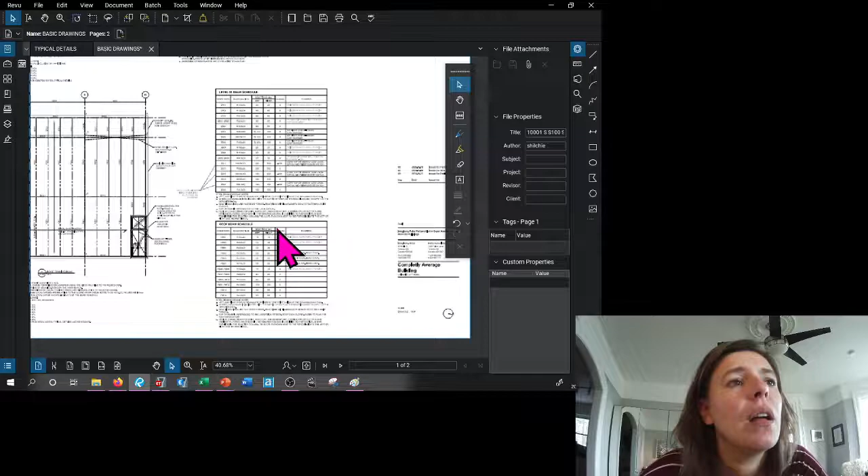There's notes for the beam schedule. There's the roof beam schedule. Let's take a look at the column schedule. So the column, let's A2. Let's find A2. All right, so here's A2 right here. So it's right at the corner of our building, column A2. Well, it doesn't look like we have a column from roof to level 2, but that's where we had the low roof portion with no upper building there.

Let's take a look on the plan. Yeah, there was no building here and here, or there was no roof above here. So you can see that there's a low roof, but then nothing here. So it makes sense that there's no column there, and that the column really starts right here.

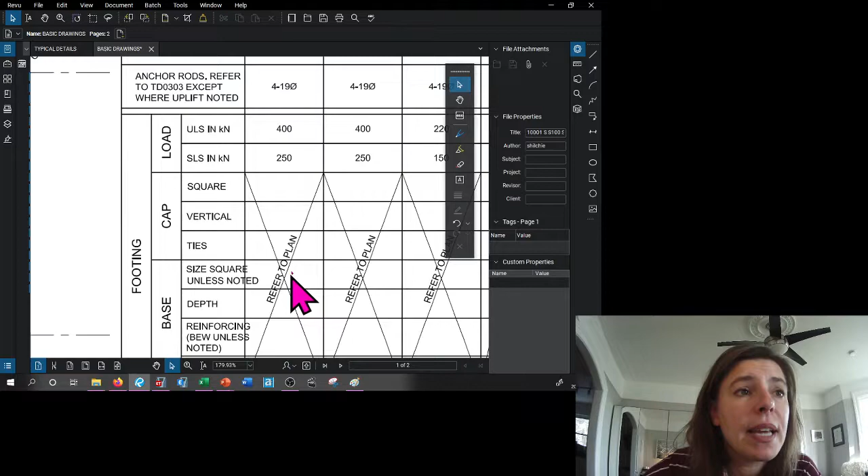So they've drawn it. They've said what the underside of base plate is. So there's an indication of how long that column is, and what the size is, and what the factored compressive load on the column is. They've said what the base plate size is, how we need to connect it to the concrete. They've given loads for the footings, and then this says refer to plan for the footings. Let's come over and take a look at A2.

Oh, yeah, sure enough, there is a footing here. There's no information, but look, oh, typ unless noted. 500 by 500 pier with 8 15s vertical and 10s at 300 ties on a 2000 by 2000 by 300 footing with 8 20s bottom each way. So a grid of reinforcing in the bottom of that footing. Dowels to match, typ unless noted at steel columns above.

So all of the steel columns have the same footing. Oh, that works. They all have that note here. So that works out just fine, except for these ones, which are just columns above. So those were our columns above that loaded, for example, our 2B11. So that's the steel building version of it. Let's take a look at it in the concrete version.

So a lot of the information for the foundation plan looks the same. Not much changes because they were both concrete foundations. One of the things that's interesting to note is look at where the grid lines are now. For concrete, we don't want our concrete walls jogging around in the building. We usually fit our steel inside the envelope, so it moving and having a center line isn't a big deal, and the walls stay the same, and we fit it inside it. Concrete, we want that outside wall to stay the same, or else it's going to look very weird, or they'll have to do weird cladding things.

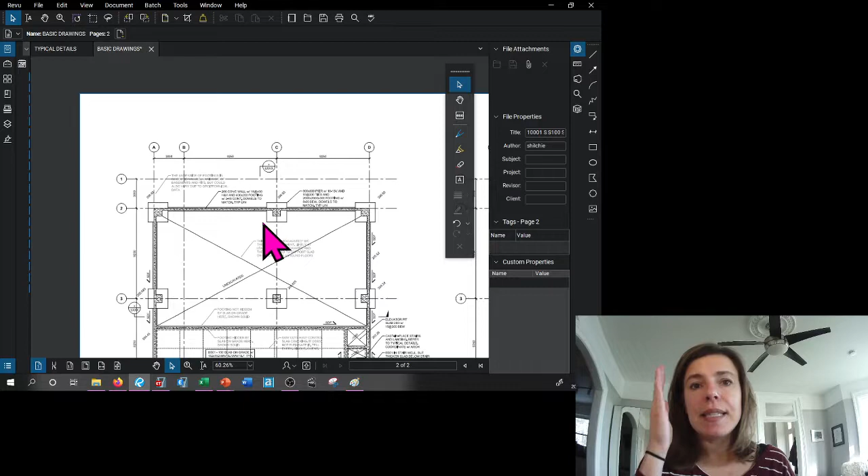So we change our grid lines to be the outside walls, and then for interior grid lines, centered on our column is a good way to do it. So we have slightly different grid line dimensions, but the overall same outline of our structural building.

Most of this stays the same. One thing that's interesting is our pier has gotten bigger. We're going to have concrete columns, and concrete columns are bigger than steel columns. So we probably should leave a bigger pier here to be able to pick up the bigger thing. Our slab on grade is the same, or our unexcavated part is the same, and our slab on grade is the same.

Even most of this is the same. Let's come over to our ground floor plan. So one big difference here, our slab on grade here, same deal. The one big thing is instead of metal deck running this way and beams or purlins running this way, we've combined those two things into one thing and made it a 300 slab spanning in one direction. It's got 15s at 300 top and bottom each way. So a grid of reinforcing top and bottom.

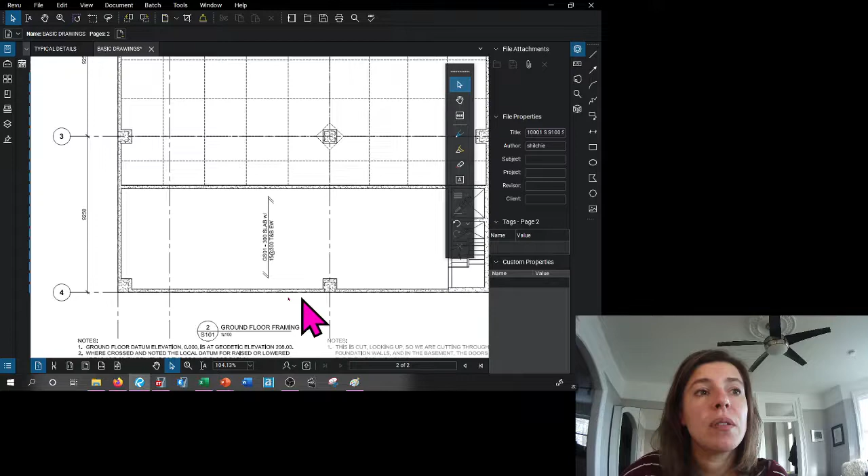And we're saying that the slab starts here and ends here. It covers this whole zone, but most of the load is going to this wall and most of the load is going to this wall. Or its tributary width, half of it is coming over to this wall and half of it is going over to that wall.

Let's take a look at our level 2 datum. So this is where it starts to get interesting for concrete. Our top of concrete is our datum. We've talked about this. The great thing about concrete is that you can often tuck at least part of your structure into the slab that you already need there.

So if I was to do a section of a slab that had a beam in it, and I showed you this, and this is the slab, and this is the beam, my beam is actually all of this zone. So I can tuck part of my beam up in the slab.

So this is cut looking up. So we are cutting between the ground floor and second floor. It's bugging me then that these lines are dashed because we're cutting looking up. So we should be showing these as solid lines because we're seeing them as solid lines, not dashed lines. I think I probably have a note somewhere that lines are shown dashed for clarity, just to kind of help your eye see it. But we are cutting, looking up at this level 2 slab.

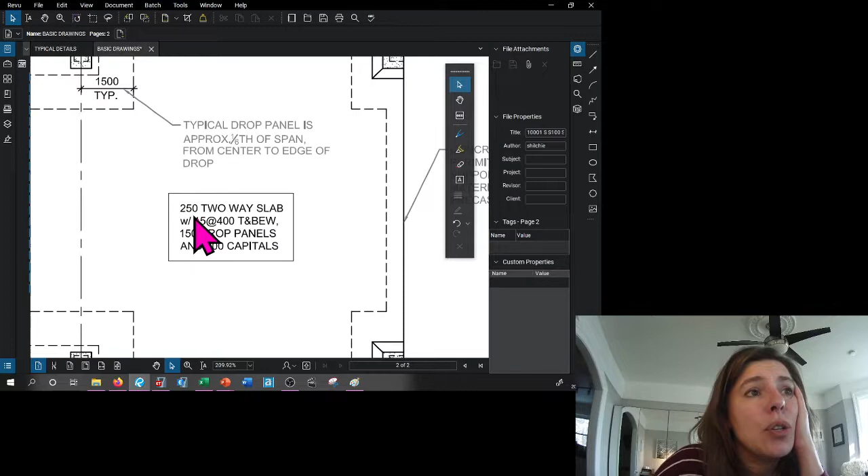What we're seeing is a 250 two-way slab. So that means all of the floor is a slab, but instead of just spanning in one direction, some of this slab is spanning over here, some of it's spanning here, some of it's spanning here, and some of it's spanning here. In this zone, it looks like we don't need a beam, but we'd reinforce that slab more there.

Over here, we have that big column above that we had because the outline of our building changes. So we have a major transfer beam, so we need a 1000 by 1050 beam to pick up that column above. So there's a big load there, so we need this beam that spans from column to column, and then we're indicating a column above here that's coming down on top of that beam. Instead of block, we're doing a concrete building, so our stairwell above grade is also going to be concrete.

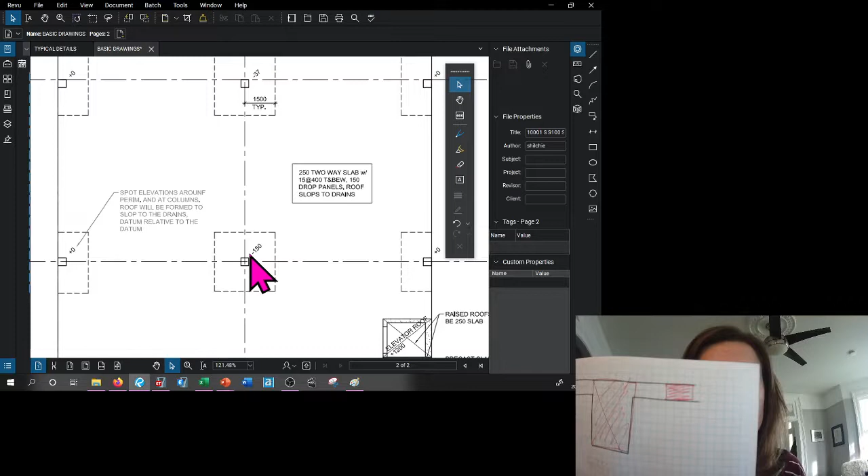I just make a note to be consistent with your labeling. You can take a look at these and read through these drawings as well. You have these PDFs. And then our roof, we are saying that there's beams here, but they're able to be within the depth of the slab. So, as much as I said that was a beam, we can have zones as well where we reinforce a portion of the slab to act as a beam as well. So that's what's happening here.

We have drop panels. I showed you those failure images of concrete, and I said that shear is really one of the tough parts of concrete. And so our slab wants to slip past our column. And what we do is we basically make a little ledger for our concrete beam. So if we were looking at a section of this, this is the top of our slab, we would be looking at something like this. This is our slab, this is our drop panel, and there's our column. So that it makes this harder to slip down around it because it's so much thicker right here. It's a lot harder for that to slip past the column.

Let's take a look at any more of those typical details. Let's go back to some of those concrete ones that I skipped over. All right, so here we had one-way slabs where they talk about the reinforcing, how that needs to look. So my drawings look pretty simple because I know that this typical detail would be in the drawing set.

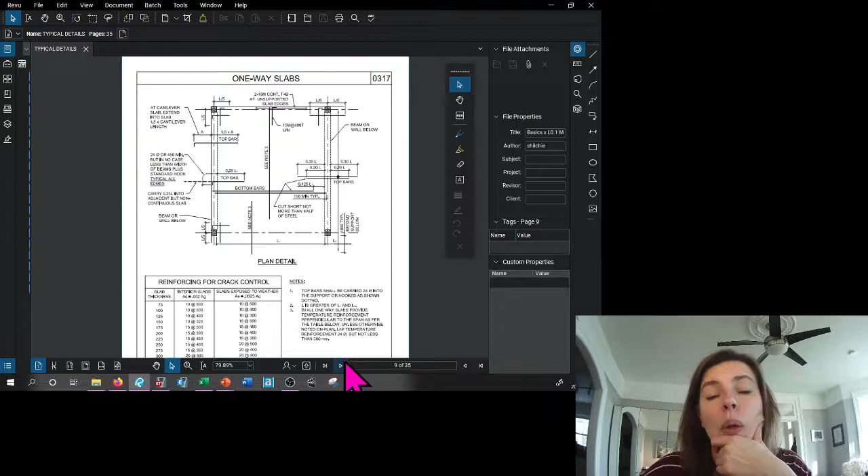Two-way slabs. So there's reinforcing working hard in both directions, and we say that this is acting like a beam in here, and we put extra reinforcing in there. Flat slab with drop panels, so you can see that these are the drop panels like I had drawn, and they talk about how reinforcing behaves in the slab because of that. This is a bit beyond what you guys need to know for right now. I just wanted to show you that there is information on this in all of the data I've given you.

Hollow core is another assembly where we get rid of purlins and concrete on metal deck and replace it with a slab. But it's a slab that we bring in and drop in place rather than casting it in place. And we're going to talk about that going forward. But you can see we have some typical details of what that looks like.

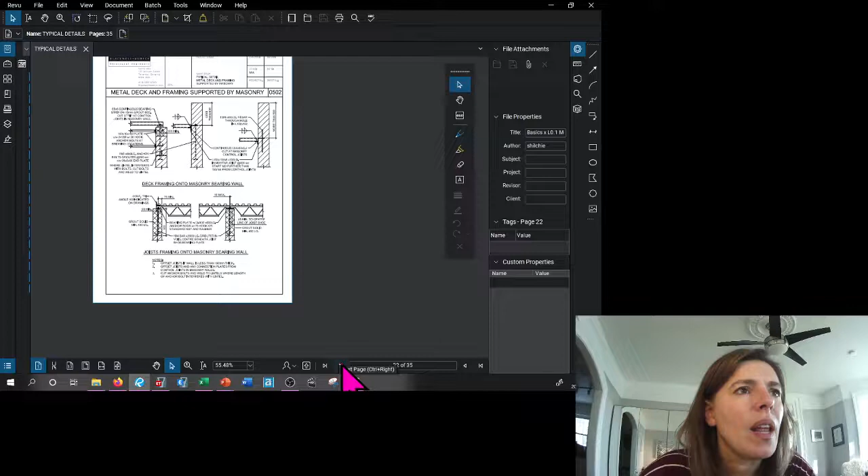Let's go past the steel ones and look at some of the wood ones. So there's wood typical details in here too, about what basic wood construction looks like. So these are things you can take a look at and flip through as you want, or to get ideas of how assemblies go together if you find that interesting for you. You can see even here, here's a foundation wall with a brick veneer, and what the wood framing would look like there. So these are all uploaded for you to be able to have a look at.

Let's come back to our presentation now. So we've gone through these slides. I'm not gonna go through them again because we just looked at them through the PDF. And then we went through the typical details. I've talked about the 2 drawing packages for you guys as well.

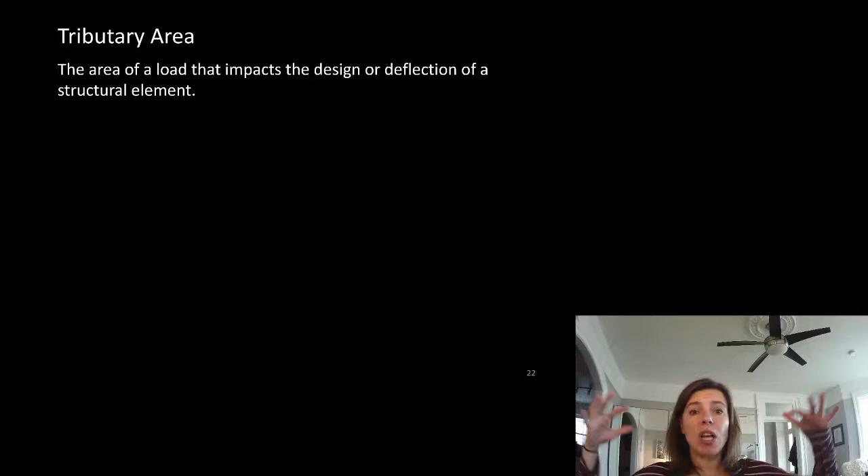So I want to introduce this concept of tributary area now. So tributary area and or tributary width is the area of load that impacts the design or deflection of a structural element. So it is all of the zone that the thing is supporting. In principle, it's very easy, and most people, I think, intuitively get it. If I took a look at that table right there, you know that each leg of that table is picking up 1/4 of that table's area. You understand tributary area. So in concept, that's a pretty easy thing to understand.

We have our whole big table, and the table is the table weight, so it's all going evenly to each corner. What if I just sit right here over this table leg? Where is my weight going? You guys probably intuitively understand that pretty darn near 100% of my load is going to this leg. Those 3 legs, each picking up 1/4 of the table weight. This leg is picking up 1/4 of the table weight plus 1 Shannon. So load is not necessarily the same everywhere for every load type, and that is really important. People have a really hard time getting their head around it.

Most of the time, if we're talking about something pretty simple, we're talking about the load everywhere. So instead of saying Shannon's going to sit right here on this table leg, we would, designing this, say, there's a pretty good chance there could be an assembly of Shannons everywhere on this table, and that's when we talk about our live loading criteria. And I'm going to show you guys that when we look at live loads in a couple weeks.

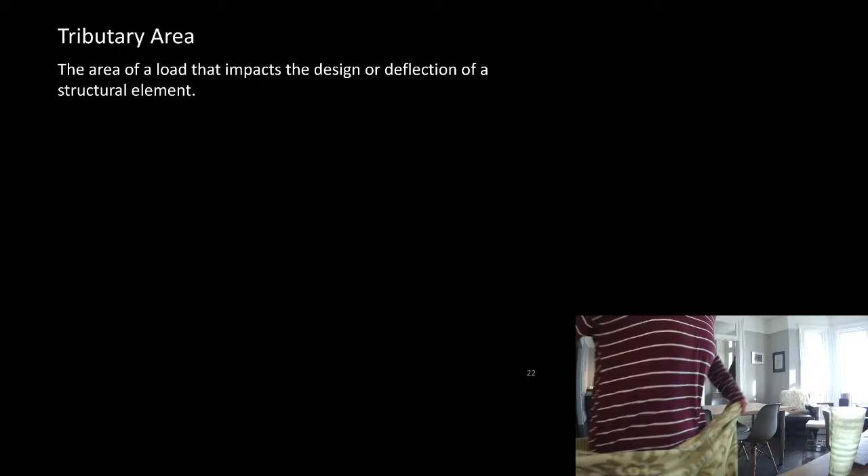Ooh, I'm just getting a package delivery. Okay, so let's keep going.

So I'm going to introduce this concept of tributary area, and then I'm going to do some calculations for you guys, showing us what that means. I find a good way to get your head around this is to talk about a watershed, or a tributary, or a river system. You guys tend to get your head around that pretty easy. And the reason I like this is because you understand that if it is a snowstorm, let's talk about the Mississippi, for example. The Mississippi watershed starts in Ohio and comes out into, what basin? I can't remember. The Gulf of Mexico. So its tributary area is massive.

Hold on a second. Awesome, thank you.

So you get that the tributary area for the Mississippi watershed is enormous. If there is a snowstorm in Ohio, there is not necessarily that same snowstorm in New Orleans, which means that snow load is only impacting a certain zone of the tributary watershed. So that one load may be very applicable in that zone, but it doesn't mean it's everywhere at the same time.

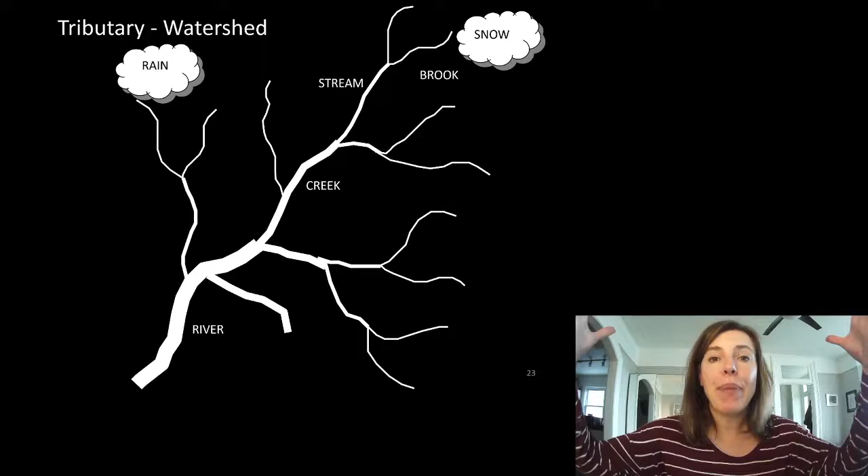So this is important because you could have a snowstorm over here, and you could have a rainstorm over here, and it could be sunny over here. So this brook here is picking up a certain amount of rain load. This brook over here is picking up a certain amount of snow load. This river is picking up this rain load and this snow load. So you have to look at everything above the element you're thinking about.

This one's pretty easy. You're going to start right here. But down here, you need to think about what all of these are potentially doing. You might make it easy and say it's raining everywhere right here, and that is my tributary area for rain. And maybe it's snowing everywhere right here, and that's my tributary area for the snow, and nothing is happening right here. But you have to be able to break that down.

And look, just because I've called this a brook and said that then there's also a stream, it doesn't mean that brooks only go to streams. Look at this brook. It's going directly to a creek. And streams don't need to go to a creek before they go to a river. You could have a stream go directly to a river. You could have a brook go directly to the river. This is simply about trying to give ourselves a hierarchy to allow ourselves to communicate what the roles are doing.

So, for example, this might be the tributary area for our brook.

Are they okay? Yeah. I need coffee and then I gotta buy my tea. Okay. Would you also fill me up a glass of water?

Sure. You're the best. So this would be the tributary area for the brook. It doesn't matter what zone of rain or snow it is, if it falls over this, every little bit of that is getting it, and it's going into the brook. That is the tributary area of the stream. That might be the tributary area of the creek, but this entire system is the tributary area of the river.

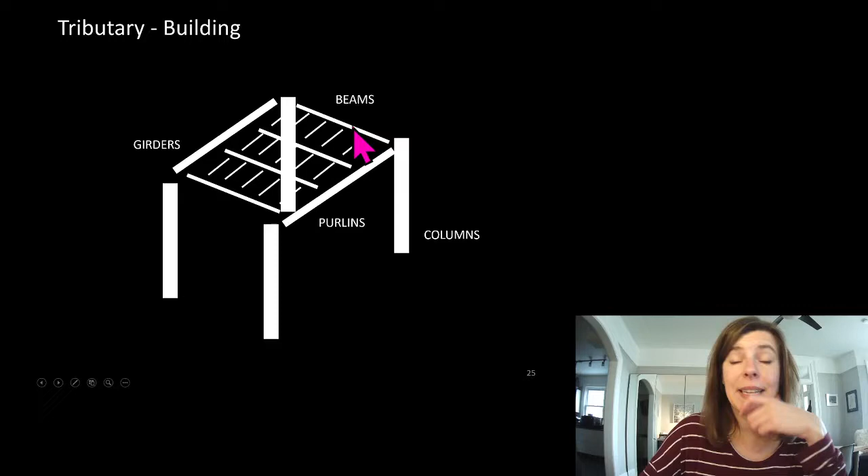So let's take that same analogy and look at it again, but maybe draw it as a building. So if we said our columns were our big major element, and our girders were a type of beam that are doing a lot of work, and our beams are a type of beam that are doing our normal everyday amount of work, look, the girder is picking up the beam. And our purlins are a type of beam that are maybe doing a little job. And in our case, they're the ones that are usually picking up the deck. That doesn't mean the beam can't pick up the deck or that the girder can't pick up the deck. It just means that the purlin's main job is to pick up deck.

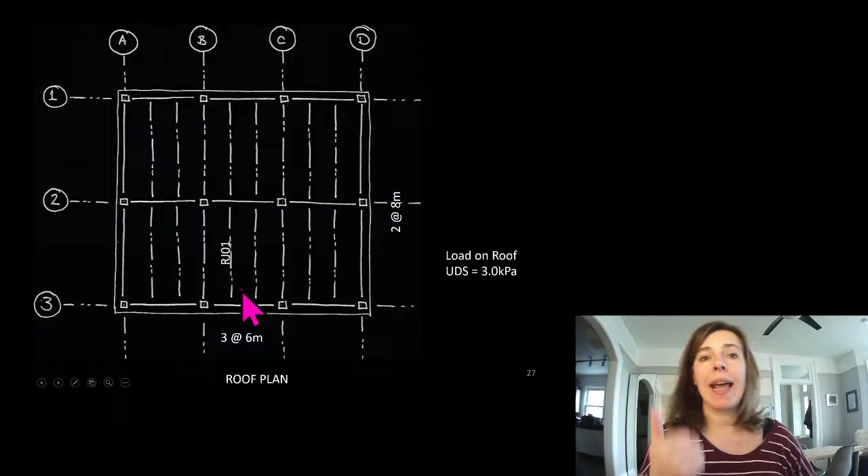Now, if this was the table, and these were the table legs at one end, and that's the table legs at another end, what percentage of the table goes to the legs at that end, and what percentage goes to the legs at that end? Intuitively, you know that 50% is going to that end, and 50% is going to that end. So it seems like 50% of this deck is going to go to this joist, and 50% is going to go to this joist. Well, if this is 2 meters, it seems like we're saying 1 meter of this is going to go to this joist.

But look, we've got this part over here as well. We've got those 2 meters there. So it looks like 1 meter of this portion is going to go to this joist. So 1 meter here and 1 meter here. 2 meters. That seems like the tributary width of this joist is 2 meters wide. It is picking up 1 meter from over here and 1 meter from over here. Or a tributary area that is 2 meters by 8 meters. So it looks like it's got a tributary width of 2 meters and a tributary area of 2 times 8, or 16 meters squared.

And it looks like that joist is identical to all of these other joists. So I think if they're all the same length and the same tributary width and they all have the same load on them, they're all the exact same beam. So we could label all of these RJ01.

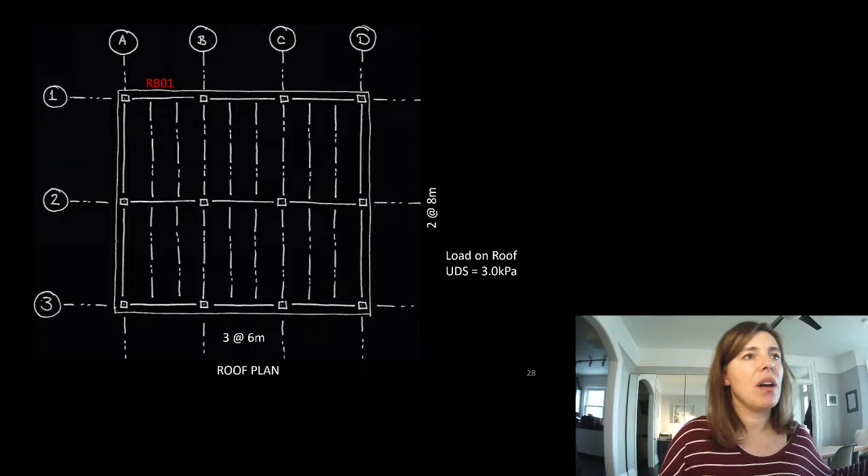So let's take a look. We have a length of 6 meters and a tributary width of 4 meters. It seems like we've got 24 meters of tributary area for that beam. Are there any other beams that look like they are 6 meters long and have 4 meters of tributary width? I'd say all of those look the same. 6 meters long, all of them, and they're all picking up half of a grid line spacing.

Let's take a look at RB02 now. RB02 is also 6 meters long, so in that respect it's the same as RB01, but it's picking up half of this zone, so 4 meters, but then it's doing it again on the other side, so 8 meters of tributary width, all the way from here, all the way to here. So 6 times 8, we've got 48 meters of tributary area.

Are there any other beams that look the same as that one? Well, I see this beam is 6 meters and this beam is 6 meters, and they've both got 8 meters of tributary width as well. So it looks like those are only 2 beams now, or are all RB2.

So we had all kinds of joists and all kinds of different beams. We now only have 3 things we have to design because most of them are duplicates of each other, all doing the same job, carrying the same load, spanning the same distance with the same tributary width. So we've cut our work down by a drastic amount by being able to identify these patterns.

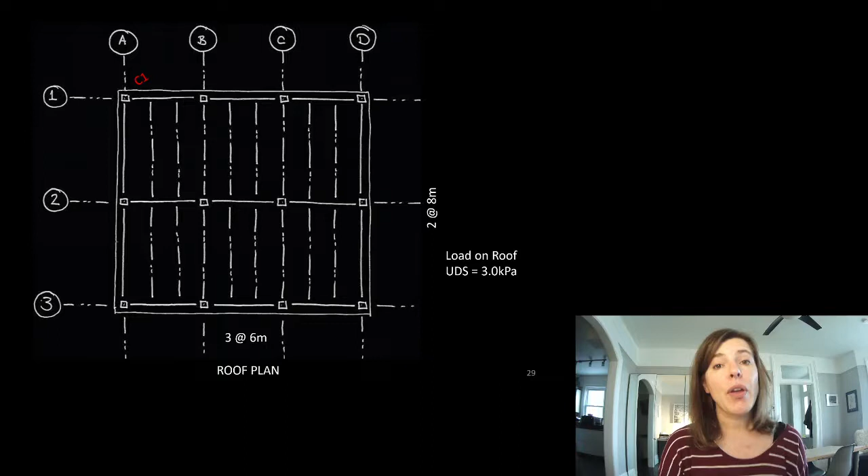Let's take a look at column C1. Now, there are ways you can do this. You could figure out what tributary half of that is going to this column and the tributary half of this is going to that. I find it easier to just look at the tributary area in whole. We've got that beam spanning and that beam spanning, or half of A to B and half of 1 to 2.

Or if we consider this zone here a table with 1, 2, 3, 4 table legs at the corners, the same way we did thinking about this table, a quarter is going to go to each leg. And so a quarter of this zone is going to go to this column right here. Or half of that distance times half of that distance. Or 4 times 3, or 12 meters squared. And look, we have 3 other columns doing the exact same thing.

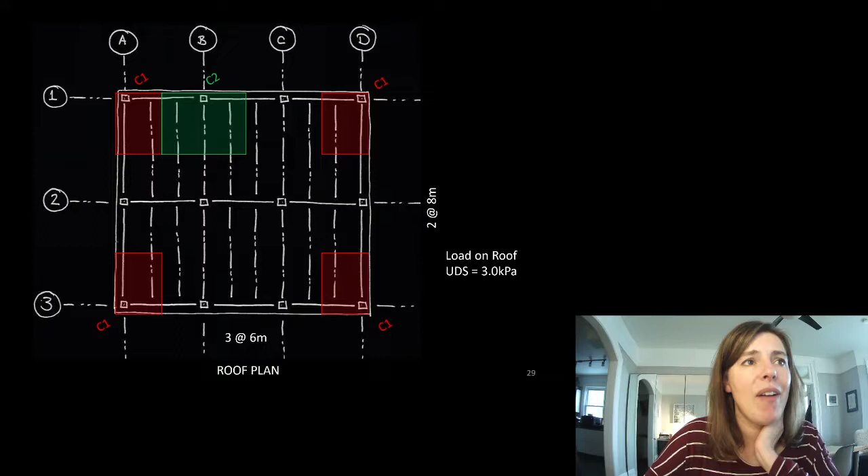Let's take a look at C2, or the column at grid line B1. Well, it's picking up a quarter of that table, if you want to call it a table, and it's picking up a quarter of that table. They're both the same, so instead of 3 meters, we've got 6 meters by 4. So instead of 12 meters squared, we've got 24 meters squared. Do you see any other columns with the same tributary area? I see this one, I see this one, and I see this one.

Column C3. Column C3 is interesting because it is picking up a quarter of this table, we're going to call it a pretend table, and a quarter of this pretend table. So we're saying that it is 3 meters times 8 meters, or also 24 meters squared. So really, its tributary area is the same as C2, and maybe we would even design them the same.

I've kept them separate just in case, but you know what, you could make them all the same. There would be nothing wrong with that. They have the same tributary area. Same with this column over here.

So we have column C4, which is now picking up a quarter of this zone, and a quarter of this zone, and a quarter of this zone, and a quarter of this zone, or 48 meters squared. And that one is the exact same. So that's how we would do the tributary areas for our purlins, the tributary areas for our beams, and then the tributary areas for our columns. So we're looking at layers there, and I find it helpful to sometimes stop and think about them individually.

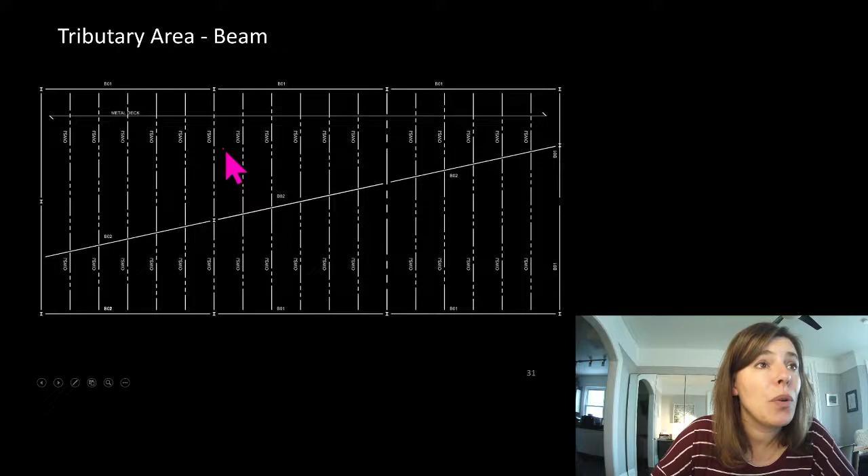Well, if we look at this beam here, it is picking up half of this joist, and half of this joist, and half of this joist, and so on. So it's got a tributary width that varies. It's got its tributary length, but then a tributary width that varies. So its tributary area is still calculable, but it's got a tributary width that changes along its length.

This one's a good one to look at because look at this. It's going to pick up half of that joist, half of that joist, so this tributary width varies, and then this tributary width varies.

These ones, this one throws people off completely. These all have the same tributary areas. They have the same tributary widths because you can actually draw it to scale. That's why sometimes it's helpful to draw it, because you can really just see exactly what's happening here. These ones do vary. You can see that those are different, and those ones are going to be the same, and then those ones are going to be the same. So we can still calculate tributary area.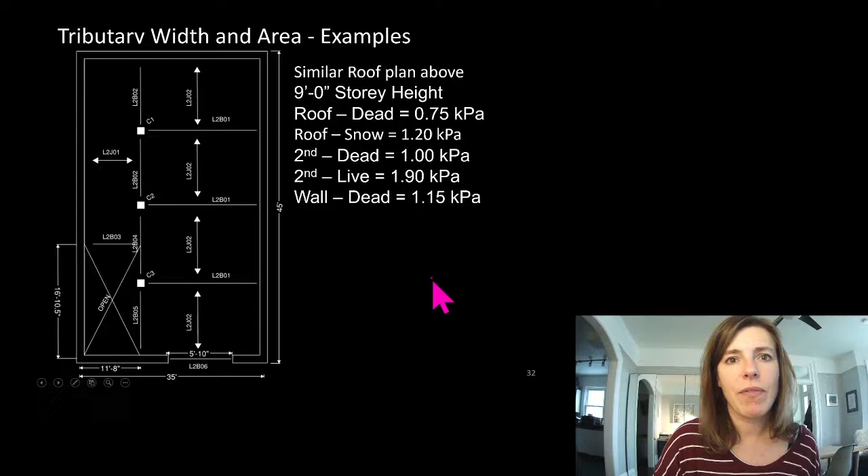Let's do some examples, and it might be easiest if I stop and show you my work. Maybe I'll work this out with you. I will talk about the things we're gonna look at. Let's take a look at L2J01, or Level 2 Joist 01. This is a wood building, so that does not mean open web steel joists. But they've told us that they are at 16 inches center to center. So there's a whole bunch of joists framing across this zone.

They've told us to look at L2B01, or that beam, and there's 3 of them that look identical. They've told us to look at L2B02, or those 2 beams that look identical. And they've told us to take a look at L2B06, or that beam right there.

So, I'm trying to decide if it's worth you seeing me do these hand calculations out, because I don't know that it's going to give you much more information than me talking about it. A lot of the times I think there's a huge value in you seeing me work out the calculations, but there's actually not that much to these calculations. I show more in these diagrams than you need to know. If at the end of the term you want to go back and do some practice work, this is a really good one to check out. So don't worry about all of this right now.

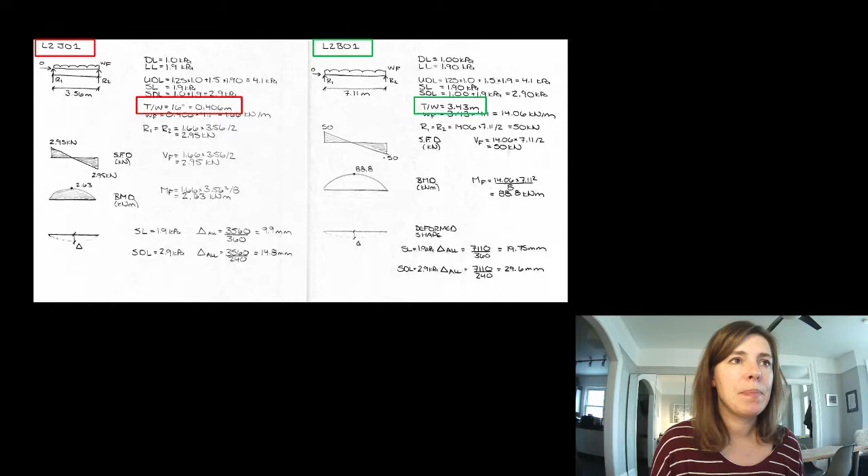So L2J01 spans from this line to this line, and it says that that is 11 foot 8. So let's calculate that out. 11 foot 8, we have 11. Well, maybe I will do these out for you guys. All right, I'm going to stop this, flip my camera down, and I'll do this on a piece of paper for you. Okay, so let's start with our very first beam, which is L2J01. So that's this beam over here that spans from this wall to this wall, and it's 11 foot 8.

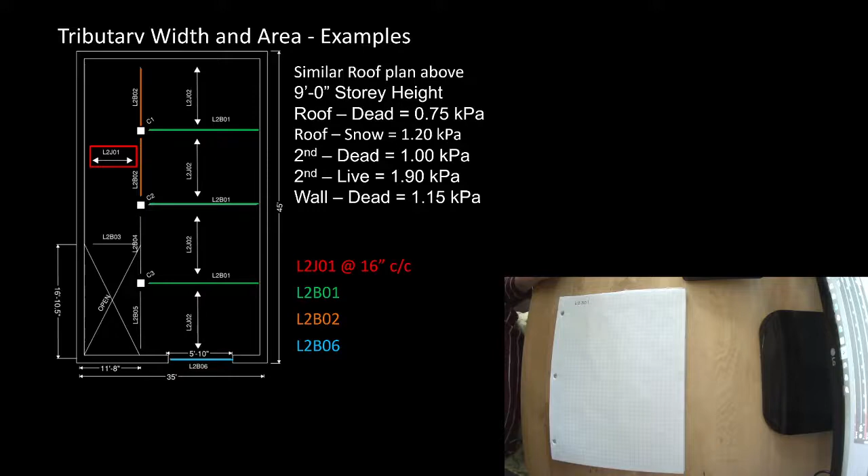So we know that its length equals 11 foot 8 inches. Well, we find it a bit of a pain in the butt often to work in imperial, so we're going to switch this over to metric.

Kids take my calculator sometimes.

We're going to switch this over to metric. We've got 11 times 12 plus 8, times 25.4 equals, so we can plug this into the calculator, 11 times 12 plus 8 times 25.4, we get 3,556 millimeters, or 3.556 meters.

They told us that we had L2J01 at 16 inches center to center. So that means every 16 inches there is one of these wood joists. So our tributary width, that means that it is going to pick up 8 inches of deck on one side and 8 inches of deck on the other, or our tributary width is 16 inches, which is the same thing as 16 times 25.4, or 406.4 millimeters, which is 0.406 meters.

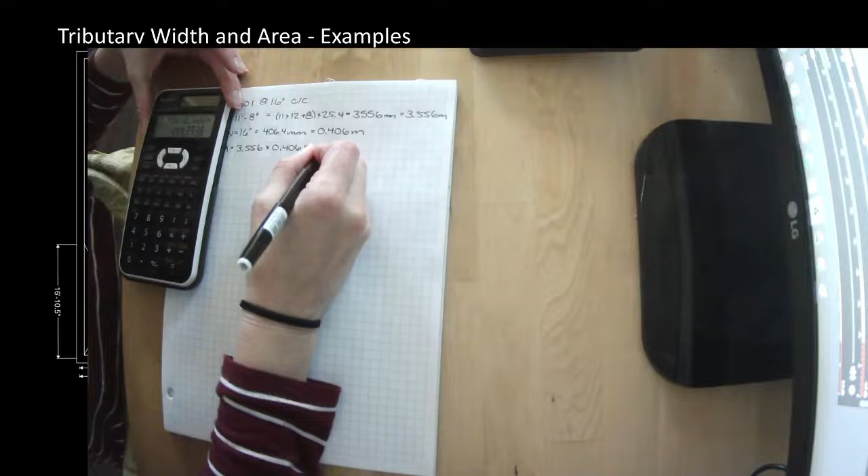So we have a tributary width of 0.406, and then let's figure out our tributary area as well. 3.556 times 0.406. We're going to get a tributary area of 1.44 meters squared. So we've taken our beam and we know what its length is, and we know what its tributary width is, and we know what its tributary area is.

The next thing they wanted us to talk about was 2B01. So that's these three green beams. So it looks like its length is from this wall to this line right here. Well, they haven't given us that dimension, but if we were the contractors, if there's something that we can interpolate from the drawings, they don't need to give it to us. We should be expected to figure out that that distance is 35 minus 11 foot 8. So let's take a look at that.

Let's do our L2B01. Our length is going to be 35 feet minus 11 foot 8 inches. Well, we already know what 11 foot 8 is. We know it's 3.556 meters. So let's just figure out what our

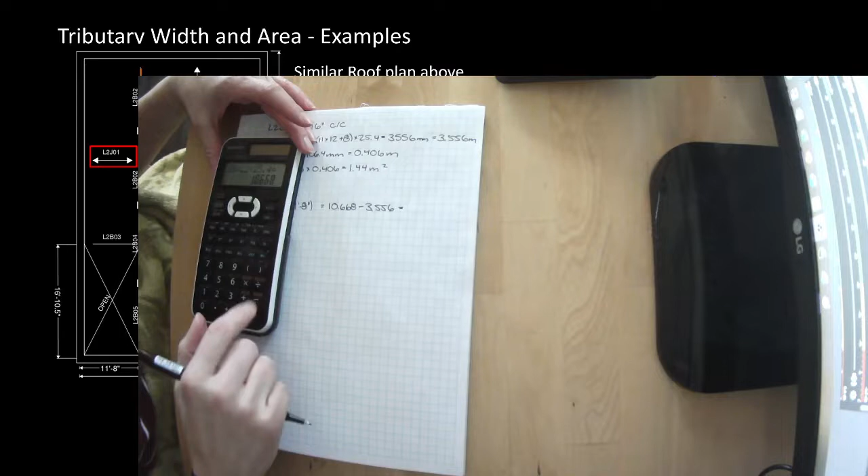So we can figure out how long our 35 feet is: 35 times 12 times 25.4 divided by 1,000. We have 10.668 minus 3.556 meters. We have a length of 7.112 meters. So we have a length for our 2B01.

Let's take a look at this. Its tributary width, it looks like it's picking up half of this zone and half of this zone, or a tributary width of here to here. Or essentially, if these were at some equal spacing on center, we would know that it's about the same as that spacing. So half of this spacing and half of that spacing is one whole spacing.

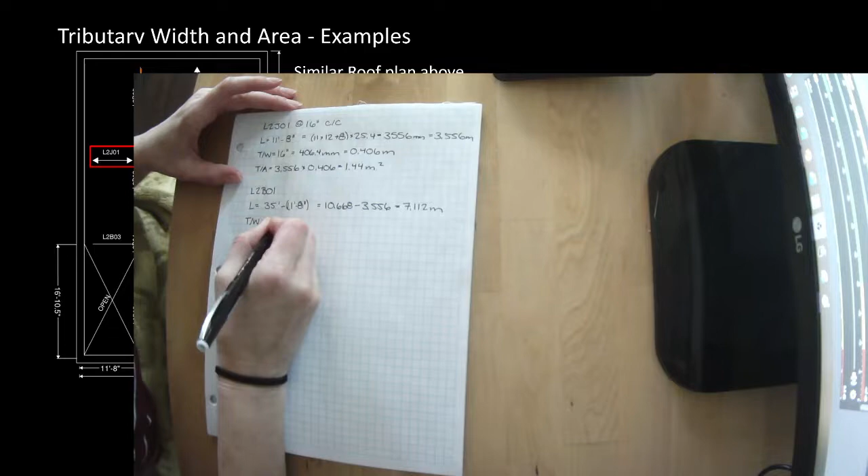So they've said that this entire distance is 45 feet. So 45 divided by 4. Each one of these distances is 11.25 feet. So we're picking up half of 11.25 feet here and half of 11.25 feet here, or a total of 11.25 feet. So our tributary width is 11.25 feet, which is 11.25 times 12 times 25.4 divided by 1,000. That equals 3.429 meters.

So we have a length and we have a tributary width. We can calculate the tributary area of this beam is 7.112 times 3.429. Let's plug that into our calculator. 7.112 times 3.429. We get 24.4 meters squared.

They wanted us to take a look at L2B02, or these two beams here, that span from here to here. So we've already figured out that distance. Each of those distances was 11.25 feet. So we're talking about L2B02. The length was 11.25 feet, or 3.429 meters is the length. So now we need to figure out the tributary width.

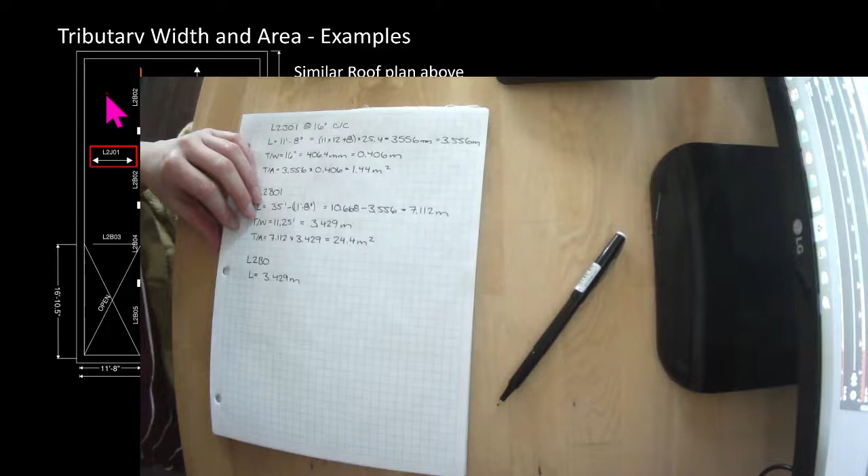If these were open web steel joists that were at 2 meters on center, no, we definitely want to think about including that. But 8 inches, I'd be okay with that. I can't even remember what I did in the example, to be honest. I'm in fact gonna flip ahead and see and maybe do the opposite of whatever I do there.

So remember, there's all kinds of information in this that you guys don't need. This is stuff that you will be able to figure out by the end of the term. Right now, all I'm looking for is the tributary width, and then I'm doing the tributary area for you right here. It looks like I did include the 8 inches. So we'll do the same here.

So our tributary width is half of the L2J01s, which we know were how long? 3.556 meters long. And then half of the 16 inches in between these. So we can calculate that tributary width. So tributary width is 3.556 divided by 2 plus 0.406 divided by 2.

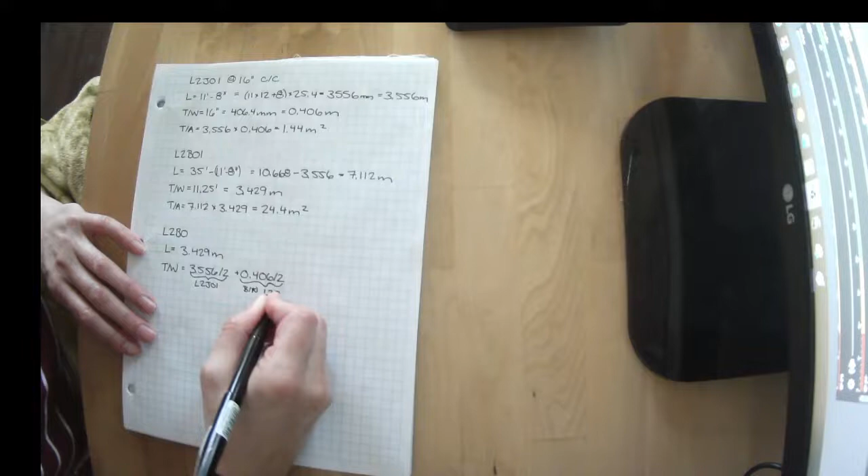This is from L2J01, and this is from between it and L2J02. We can calculate that, and we get 3.556 divided by 2 plus 0.406 divided by 2. We get a tributary width of 1.981 meters. Often for analyzing these sorts of things, what we really need is to know tributary width, but I'm doing the calculation for tributary area as well, just to help give you an idea of what that looks like. So just for completion, let's do the tributary area of this as well.

3.429 times 1.981, or 6.79 meters squared. L2B06, we have half of our L2J02. So essentially half of the tributary area that these L2B01s had, and it is spanning 5'10".

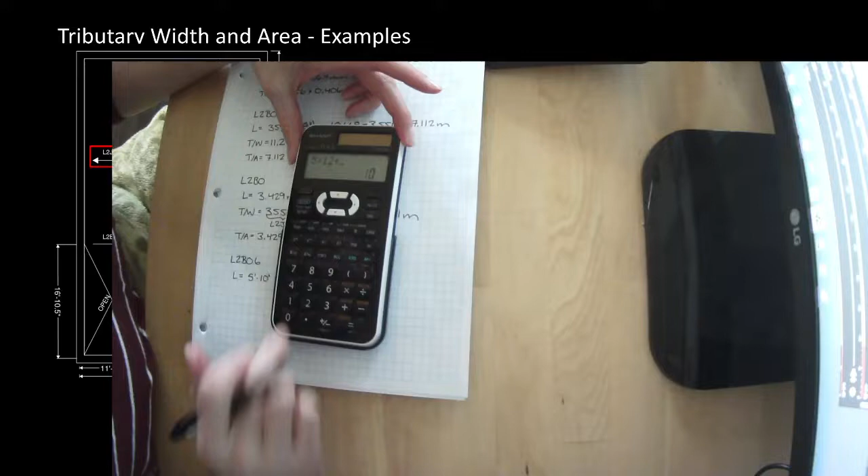So we are now doing L2B06, and its length is 5'10", which is the same thing as 5 times 12 plus 10 inches. So we have 70 inches times 25.4 is 1,778 millimeters, or 1.778 meters. So that's how long our beam is.

And our tributary width, we determined, is only half of that 11.25 feet, or 3.429 divided by 2. 3.429 divided by 2, or 1.715 meters. And our tributary area is going to be 1.778 times 1.715, or 3.05 meters squared.

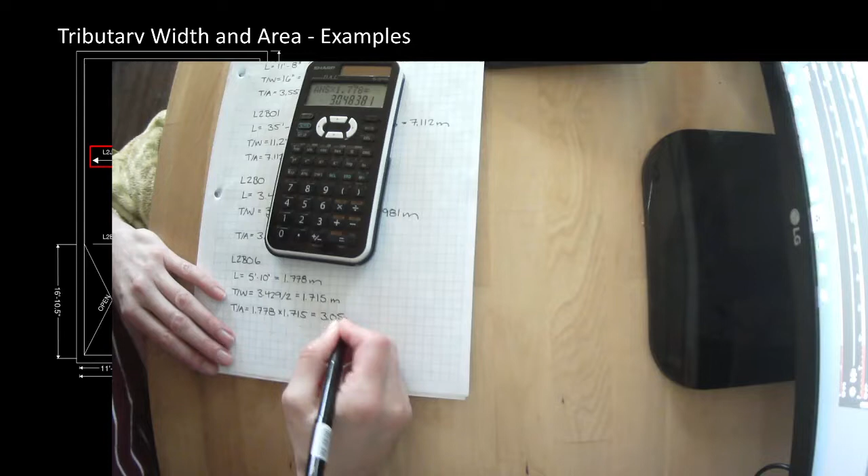So this is just to try to show you tributary width and then also simultaneously tributary area. You're going to do some calculations of this in your assignment. You can see here that I've shown you these tributary width calculations. Don't worry about all of this. Like I said, that's what we're going to do by the end of the term.

Okay, let's talk about the project now for a minute. We'll switch this back to looking at me. I know you've missed me. Let's bring this camera back around. It's not the most elegant solution, I apologize, but it does the trick. I'll turn some light back on. I know it makes me a bit brighter, but I can see a bit better now.

Okay, so I have posted your projects for you. You obviously don't know how to do them yet. There's a lot of information you don't understand, but it's to help get you thinking about them. And I gave you some kind of ideas for dates on where you should be. You know what, I'm a procrastinator. I would probably wait until the last minute. I'm not recommending that. Don't do that. Please pretend you didn't hear me say that. You should definitely follow these dates that I've suggested as guidelines.

So this is a PDF that's been uploaded to Quercus for you in the project module. There are two parts, like I've said. This is the creative side. The idea here is that you guys all have a creative vein, or else you wouldn't be in this discipline that you're looking at. And I don't want you to get uninspired if you have a creative side by being in this class. So I want to try to balance the math and what I find very interesting with what I know you really want to be studying while you're here.

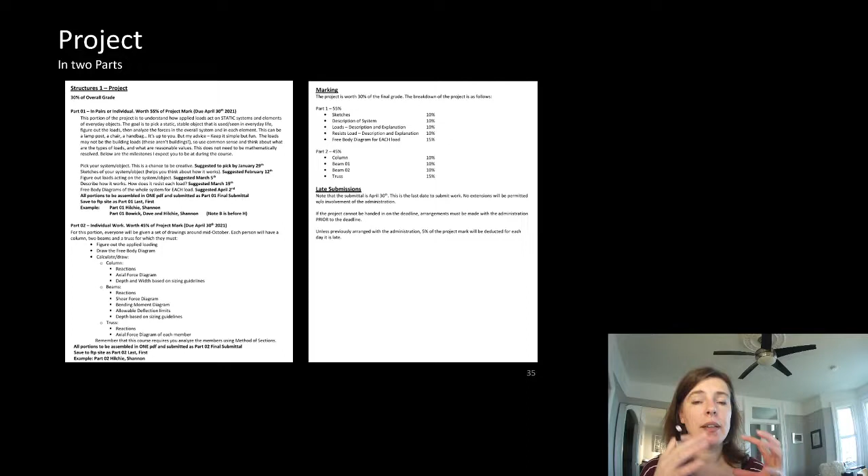So I have added a component to this project that lets you be creative. So you get to pick an everyday object and think about it when it is not moving, and all of the loads that might be applied to it while it's not moving. These do not need to be the building loads, but you should be thinking about the worst case loads of that type.

We're going to talk a lot about loads on buildings, and maybe some of the building loads are applicable for you. That's going to be up to you to outline. You're going to do some sketches of it. This is a chance again to be creative. And you want to be thinking about its position in space, and where does it sit, and how does it sit? If it gets picked up, where do you pick it up? Because those are all the reactions on the object.

So there's all the loads that are applied to it, and then there are the things that stop it from moving. So if I pick up my coffee mug, it is filled with coffee. But when I hold it, my hand is what stops it from falling in space or tipping over. My hand is the reaction for the cup.

So start thinking about that, because then you're going to take your beautiful drawings and you're going to turn them into structural free body diagrams, which is literally that beautiful object turned into a stick figure with all the loads as stick figures and all of the reactions as stick figures. And you're going to have to do that for all of the different load types that you can think of. And then you're going to talk a little bit about those loads and what that looks like.

Part 2 is going to be, I have posted an arena project that you are going to draw shear and moment diagrams, free body diagrams of those objects, and you're going to analyze them, or at least the first half of analyzing them. All of that's going to become clear as we go through the term. One of the things you're going to do is look at the tributary width of your beams. So you've already got some portion of it that we've already talked about today that you can now do.

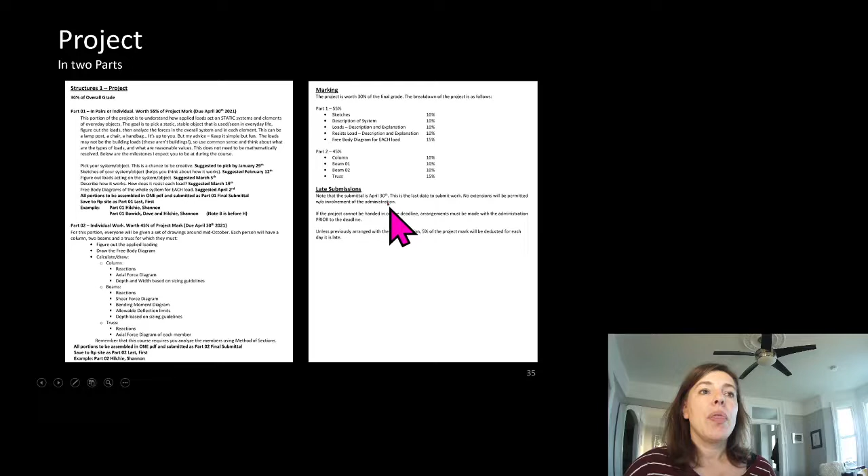And then I've listed out what you have to do for all of those elements. Again, that's going to become much more clear as we get closer to the end of the term. The due date isn't until the very last day of class, but you have your exam before that. And I find the people that have at least taken a crack at the project do much better on the exam. Maybe you don't have time to finish it, or at least part 2, but you should take a look at part 2 and get your head around it, because you're going to find it's a good studying technique for the exam.

So that wraps up today's lecture. You should be able to produce structural drawings. I know, probably not yet, but you should be on your way to thinking about structural drawings. You should definitely be able to calculate tributary width and tributary area of elements, especially the more basic ones. There is one in your assignment that is slightly more complicated. Take your time, think about it.

I'm not giving partial marks. There's a right answer for that one, and you're going to go through and you're going to do it and you're going to practice it and you're going to try to get it right. Talk to your friends. Try not to just share answers. Try to actually think about it a little bit. And you have TAs that you can ask help from. But I want you to be able to work on calculating tributary areas of things. And remember what I talked about open areas on floors.

Okay, so that wraps up week 2. And next week we're going to start talking about buildings and how they go together. Again, it's a bit of a snooze fest. In fact, next week is literally just a bunch of slides with lists on them. So I apologize. Make a drink of coffee beforehand, pop some popcorn, get ready to just try to absorb the information. I apologize, it does have to exist as a lecture, but we'll try to make it somewhat interesting if we can.